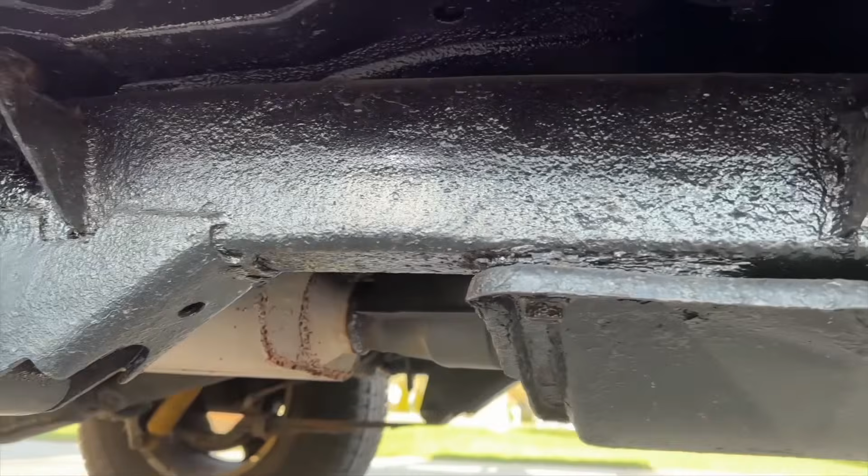Hardtop came with it. A lot of work's been done to this already. It's been rust treated underneath it. Frame has been repaired where it has needed to be. And I'm telling you, I'm in love.

So one of the spots that always go bad on these Jeep Wranglers are the floorboards. And we can see here, somebody already welded in brand new floor pans into this Jeep, both sides. I haven't had a chance to investigate all the way in the back yet, but that's huge. Also, when running a magnet down this area on each side, this is a big area for rot on YJs. This is all solid, looking really, really good.

And if I can get under here real quick, it's all looking really clean along the rails. The light's not cooperating with me at all here, but somebody took the time to take care of this. Frame all the way to the back, to the front. Looks really good. I actually took a really good magnet before when I was inspecting it.

I went through and checked stuff. You can see here we got weld plates in. It's been repaired, but it looks like it's been repaired really good. And man, if somebody's taking the time to go through all that work, that's a good sign for the rest of the Jeep.

She's got some big meaty tires on there. Darn near new. I mean, look at the tread on these. Gonna run those for a while, but I'll probably downgrade those, make those a little smaller. It's a lot of work for that little 4-cylinder.

But there it is. That is gonna be a project. It's gonna need some repairs. You can see here, this is the only major rust damage, knock on wood, that I've found so far is in this windshield frame. You can see going down there, that's a very common spot for these YJs to go bad.

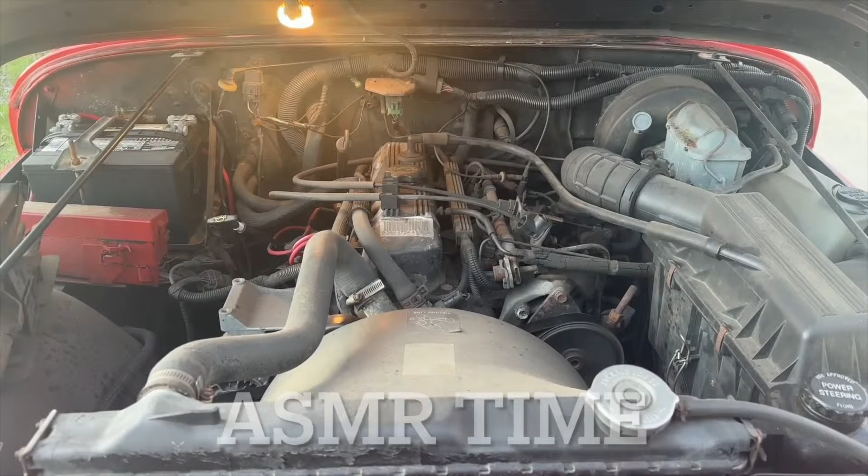And here's the power plant, inline 4. That's how these roll, and this actually looks pretty darn clean. Can you believe that light actually works? Those never work. Looks like it's got fresh wires, distributor. Battery doesn't look that old.

A little bit of cleanup, this is going to be no problem, but we'll start going through stuff one piece at a time, as we always do. But there it is, right there.

Sure, it's going to have its little issues, but first look at it. This motor compartment looks pretty good to me. We got new muffler and exhaust all installed on it, and also skid plates all the way up on this too.

Kind of leaning underneath the car, taking a look with you for the first time almost, because I literally just pulled this into the driveway not too long ago. I've been wanting a Jeep Wrangler again for a long time.

And we got one. First things first are gonna be get this bikini top off, so I can go pick up the hard top that came along with it. I always preferred mine with the hard top on it. So this bikini top's got to come off, which is super easy.

The only thing with the soft tops is that there is a small little rail underneath here that you got to take off before you put the hard top on. So I got to pull that off.

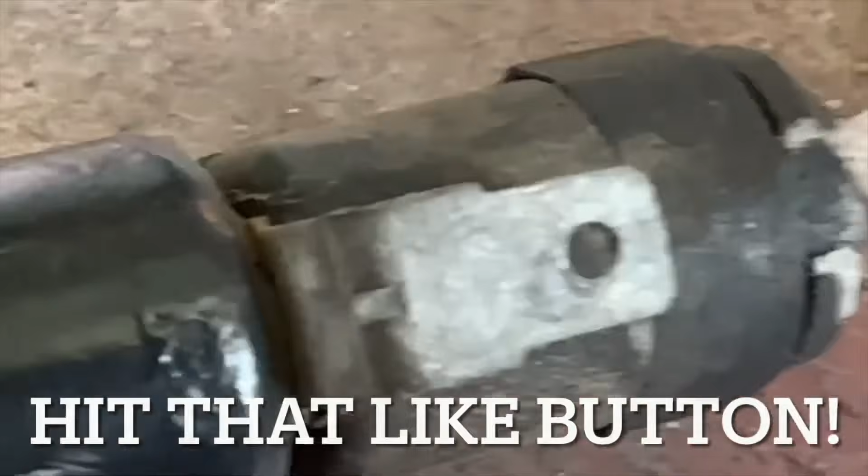Just tilt the bar a little bit, do that on both ends. Here's a closer look at that little ring we're dealing with. Basically you just want to slide your screwdriver - there's a little notch there even - you can slide right under and then pry that up. That's all you need to do.

We'll come back down to this bottom end, it's going to be the same thing. Just slide in a flathead, pulling that clip back just a little bit and tilt that stabilizer out of the mount, just like that. Also note, silver end goes to the window, solid black end gets mounted to the actual hardtop.

Before I install those, I'm gonna go ahead and clean off these mounting points. They're a little dingy, a little dirty, so let's clean those up a little bit. Just gonna put a little dab of all-purpose grease on each one of those mounting points. Don't need a lot, just a dab will do ya.

After you grease those up, you're good to go to install your new supports. Kind of new to the YJ stuff, it's been many, many years since I've done this. I was looking at Jeep part websites, and take a look at this.

It really does pay to shop around a little bit. Here's a well-known Jeep website - stabilizer, $32.99 each, man, ridiculous. Way better option, half the price - head on over to your local auto parts store. I went to AutoZone and got a lift for $17 each versus that upper 30 number I was seeing everywhere else. So honestly, with these old Jeeps, hit up your local auto parts store. Nothing specialized about this, straightforward. Save yourself some cash, you're gonna need it.

Second verse, same as the first - again we're just gonna grab it, tilt it, pop it right on. Go ahead and lift up our gate. You might have to twist the end just a little bit. Lift that up, drop that in, just like that. And now we've got ourselves some stabilizers.

Ah, what a relief, no more banging of the head. Closes up really great, bam - there we go, new lift stabilizers installed on the Jeep Wrangler. And now when I lift it, it magically stays up. That's awesome because I've been storing all my tools and everything in here for the Wrangler and just working out the back, so this is gonna save me a ton of literal headaches.

So really, that's all there is to it. I'm gonna have to come back and attack these another day - I can't live with that. But the new stabilizer is in, and we're good to go. That's about it, man, this is about the simplest little upgrade or fix that you can do on anything. I mean, that's how it's gonna work on pretty much all vehicles.

Quick look here - I did end up finding a set of hard doors for it. Right now I've got the soft top, lower short doors. I got myself a pretty good set of doors, they're gonna need a little bit of work, but overall I've really lucked out with this YJ.

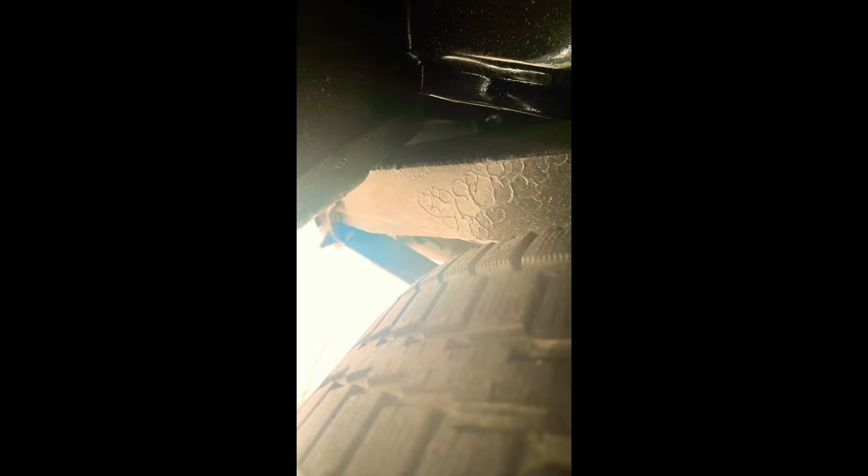Somebody already did the major welding on the frame. Somebody already welded in brand new floor pans. How about that? Everything was undercoated, a little to excess, but rather have it than not.

Someone was kind enough to include the locking lug socket with the Jeep. That's a win. Can we talk about more excellent welding repairs on the frame? That's so huge. Got this really fancy front bumper, never had one of those before. Even got myself kind of a fancy rear bumper. Kind of cool. Those are just a few things I got lucky with on my YJ.

I've never been a huge fan of the half doors on the YJ. That's why I went and found a set of hard doors to go with my brand new hard top. Well, not new, but new to me. These are going to need some work, but nothing we haven't handled before.

The mirrors are gone, but that doesn't bother me too much. I got a nice set of mirrors on the half doors. All in all, the main panel seems pretty straight. Not sure what the hell was going on there, we'll have to patch that up. Some surface rust around some of these areas, and we'll have to swap out the locks as well.

This is the big part. Usually you see those rot out right here. This one's got kind of a unique one, hoping to get that repaired. Got a little bit of rust starting here, actually it's probably a lot deeper than I think. Both the doors have all the trim pieces that match the current interior on the Jeep. One nice crack there too that'll need to be repaired. Hard top, hard doors for my YJ.

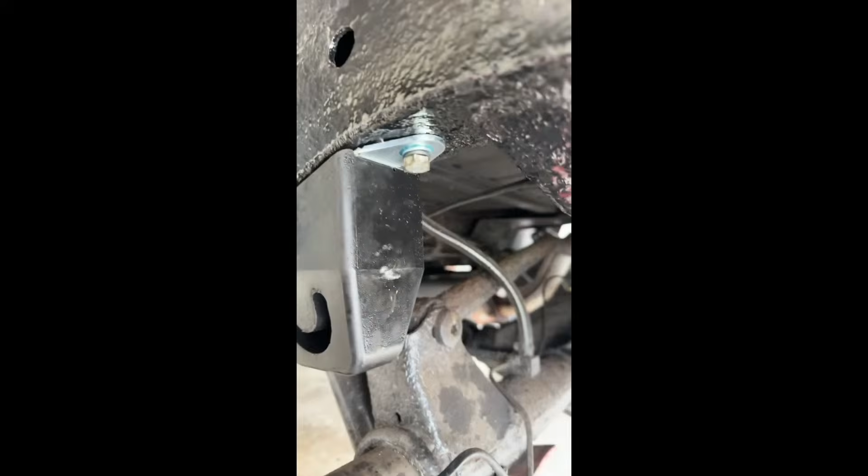All right, project update. Driver's side bump stop is in. Managed to re-tap that into an 8mm by 1 onto the passenger side.

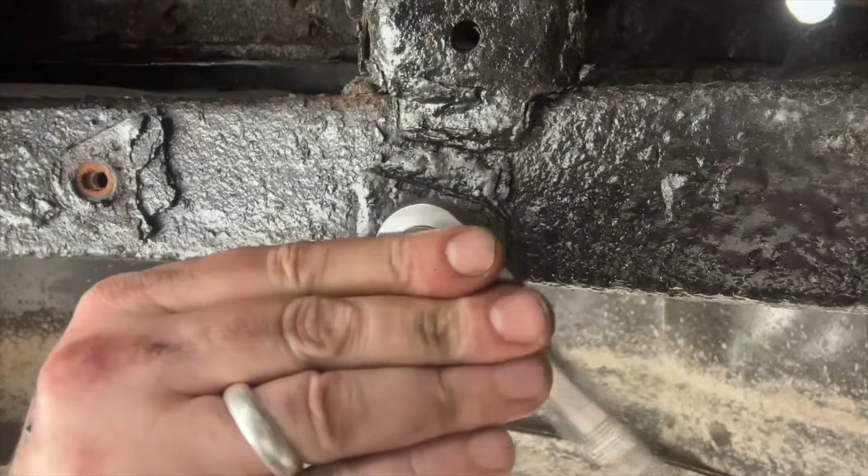Fingers crossed on the next one. All right, over on the other side, let's see if we can get as lucky on this one. Come on, baby. I think it turned a little. Gonna kind of hold your breath for a while, make sure you're not bending the metal. I think it's coming out though, I think we got lucky.

Yeah, we got lucky, we got both of them out, but I just spied another thing we're gonna want to be watching for. We got our brake line coming in right across the top of the axle, looks like there's a little mounting bracket here. This needs to get out of the way where this bump stop's gonna go, so I'm gonna see if I can get a little finesse on this and move it just a little bit, real gently, but it's got to get out of the way of this, because otherwise when that bump stop comes down, it's gonna smash my brake line. That's no good.

All right, just kind of made a little loop in it. There's enough play in it, so now when that comes down, that's gonna be out of the way. Don't have to worry about that. Something to watch for. I had to do that on the other side too. Got to be careful, that's easy to miss.

Now we just want to make sure we get all the old stuff out of here. Look at that, this crumbles right before your eyes. That's the old bracket. Just knocked it off on the other side here too. Just want to make sure I get down to clean metal, and then I'm actually going to undercoat paint this too, just to keep protecting as we go. I'm just gonna get up under here with my wire wheel, clean off this whole surface. You can see that rust kind of flying off of here. I'm gonna get this real good, try to get it down to bare metal.

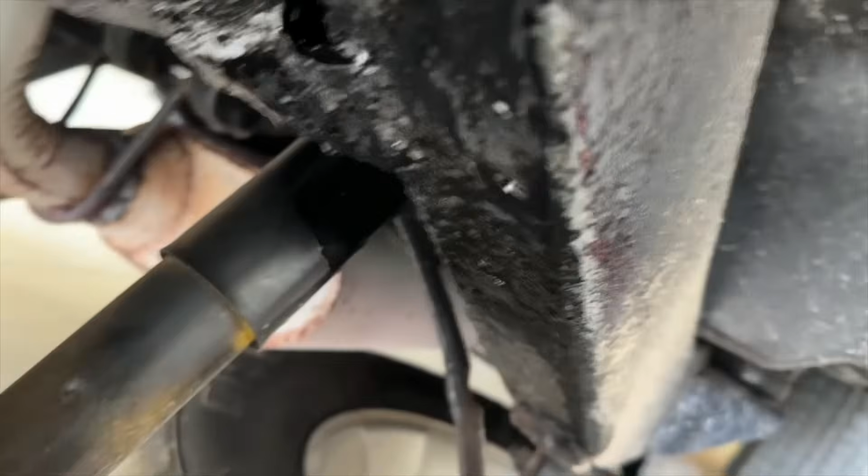All right, we're ready to place it. There's a slight bend, you can't get it wrong. They are side specific, so this is the right side, okay? Middle bolt in towards the back, and then on the outside of the frame is where our mounting position is. So this is the right side.

Let's get it in. I'm gonna tack in the first one first and just get it hanging there, and get both of them started. We're in good shape. And just like that, gonna reach up.

See if I can do this left-handed. See if I can find it. There we go, just like that. Get that one started. We'll grab our wrench.

Put that back on. Almost there. It's always fun when you get to flip the switch on the ratchet on a project. Send stuff back home. Let's go. Giddy up.

All right, that one's pretty snug, so let's hop on over to the other side here. Let's get the other one in. Rear bolts in, I'm gonna go back and tighten up the front one.

You just need to put these snug. You don't have to go all He-Man on it. You just need these nice and snug. You definitely don't want to strip them out at this point. That's about right, and there you go. With those two bolts in, our bump stop is done on the Wrangler.

I did run into a bit of a problem on the other side. A very typical thing on Jeep Wranglers is the driver's side is always a little bit more crusty than the passenger side, and I did end up breaking off one of these bolts. So what I ended up doing was drilling a new hole and tapping new threads and just got a new bolt and put it in. So if that happens, just slow down, take a deep breath, drill it out and tap it, and you're gonna be good to go. But it definitely was a bit of a time suck because I didn't have all the right tools, but now I do if I ever need to do that in the future.

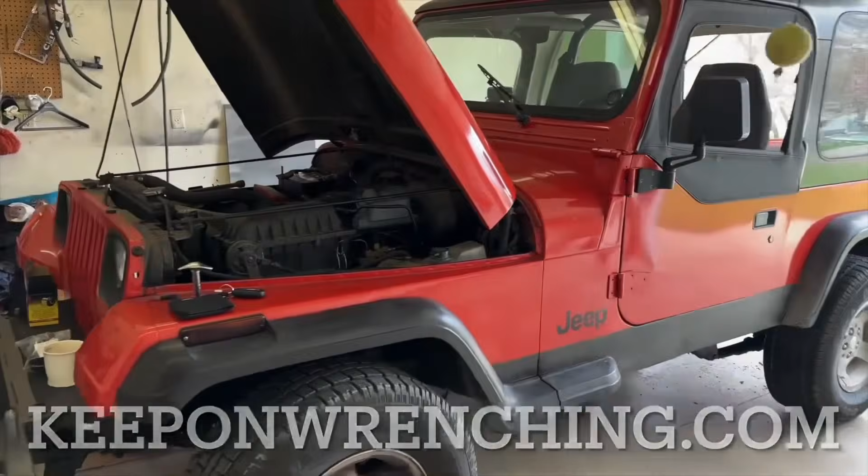Something a little different coming up on the channel. Here's a look at our next restoration project. We've got ourselves a set of hard doors for a Jeep Wrangler YJ.

They need some work. The window doesn't roll up and down on this one, gonna need to dig inside and figure out what's going on. Other than that, most of the hardware is here. We've got our strap, we've got our reel, we've got our handle here. Everything seems to work otherwise. Even got the flippy window vent.

The panel itself isn't in that bad of shape either. Needs to be fixed up on this corner, but that shouldn't be a problem at all. Weather stripping seals aren't terrible, but they are cracked in some places. I already got myself a new set, so we'll be learning how to install these. Window vents even work. A little bit of rust cleanup here, new weather strip, and these will be back in service.

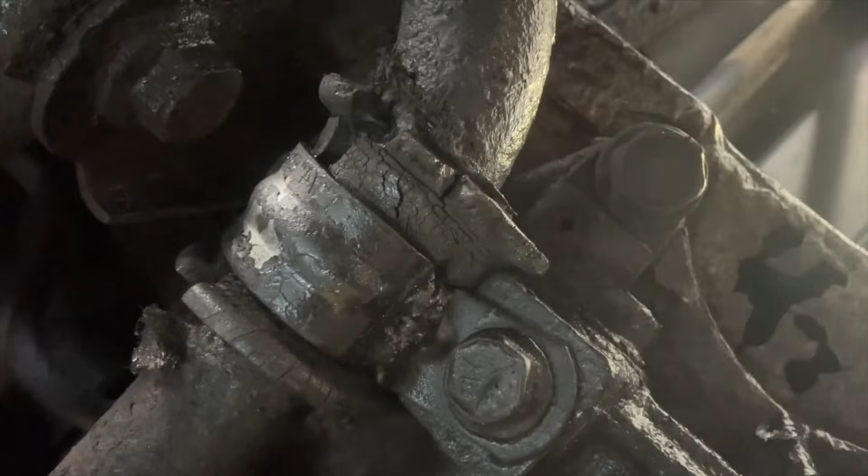Nothing too thrilling here, we're just gonna try. And I'm wondering if maybe on this side there might not be a nut. All right, driver's side, there is not a nut. It's actually put right into the casting. So passenger side, there was a nut on the top. So note to self, that does not exist. Go ahead and put your ratchet in reverse mode. This darn undercoat is ridiculous at times.

Got lucky on this first one. It's turning. There is no nut, by the way, on the top of this, it's actually into a cast piece. So passenger side does have a nut on it, but we're just going to take out this long-winded bolt.

So here's a look at it from the side. This is the bolt we just took out, and then the other one is on this back side. Doesn't feel like there's a nut on this one either. I think an extension is going to come in handy on this one. It's kind of up there at a weird angle. So I'll bust through the stupid undercoat again. Hopefully we get lucky.

This one might be a little bit more stuck on there. Come on, buddy, hard to get a grip. You gotta kind of break through that undercoat. It's a booger. That one's gonna be a booger. I got it! Woo! That was right on the cusp, I think, of breaking that. I think we got lucky on that one. That was determination.

The instructions on this clearly say to grease the inner diameter of the bushings. Pretty much anywhere metal on metal is, we're gonna wanna grease that up. And in the kit, they did provide us with a small tube of grease. All right, pretty straightforward, we're gonna grease up the inner diameter of this. Not rocket science here, just make that a nice coating of grease. This is some sticky grease that they give you. But yeah, that's all coated on the inside edge, inside diameter, as they say. Let's go ahead and get these installed.

When I was looking at this kit, I was a little worried that I'd have to take the whole bar off in order to get the bushing in, but there's a cut in them, so you basically just slip them right over. That's really, really nice.

All right, here we go. I'll try to give you a good angle here. I'm just going to use the split, expand that over there. Flat side up on that bushing, just like that. And then you're going to grab your bracket, put that in. That looks like that's going to be perfect.

And then the tricky part, I'm on the passenger side now. You got a nut and a bolt on this, so we're going to get that in there, get that lifted up. There's a little bit of tension once you pull this off, but it's nothing you can't just push on yourself. Go ahead and get your nut started on that. Let's go ahead and grab our other one over here. Slide that up, give her a little bump, and tighten that one on.

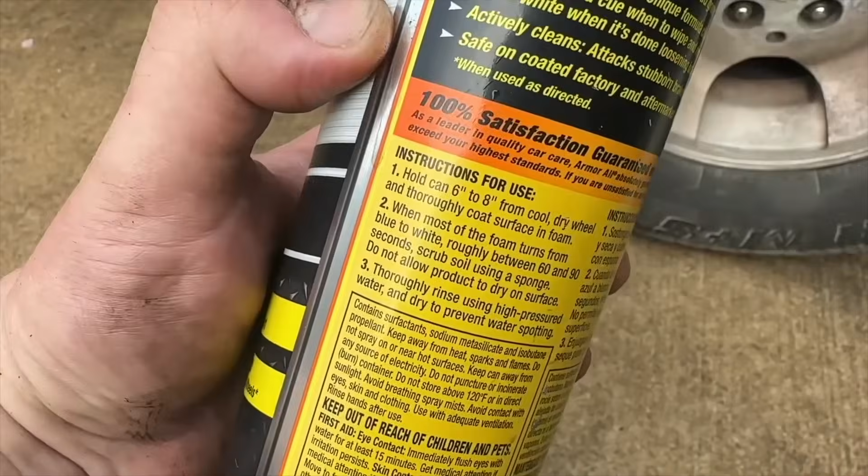All right, 6 to 8 inches, this must be important, let's spray this down. Look at that pretty blue, look at how nice that is. Ugly wheel, hopefully it's going to be gone here in just a matter of minutes. They say it should turn white within 60 to 90 seconds.

And then we get to scrubbing. One thing I'm noticing right off the bat is that this stuff just kind of falls off the wheel. I'm constantly reapplying it, which the instructions didn't say I was supposed to have to do. What's going on, guys? Yeah, I'm not sure what's going on, all my product seems to be falling off. It hasn't turned white yet, so I'm just going to start hitting it with the 3M pad and see what kind of damage we can do.

Break through this stuff, I already know the corrosion is through the clear coat, but ooh, look at this. Wipe that away, that looks really good. Yeah man, I hate clear coat. Have I ever mentioned that on the channel before, how much I hate clear coat? Because you got to constantly fight it all day.

I'm going to keep wiping this down, we'll see where we end up. I think it's going to take a couple coats, honestly. You got to put in the work if you want clean wheels. All right, been scrubbing, now it says high pressure water, rinse this bad boy off.

So you can see that clear coat is really eating through, but it didn't do too bad of a job cleaning up things that weren't totally damaged. I think I'm going to hit it one more time, I got some little details to get to.

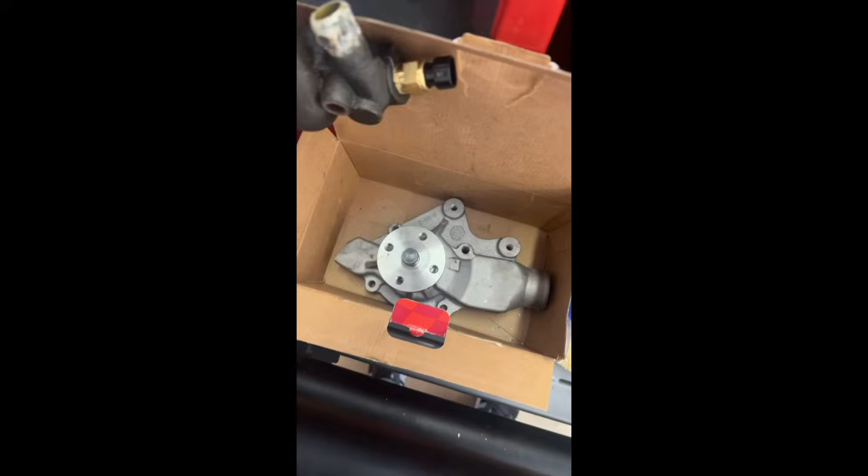I'm installing a new water pump. There are a lot of bolts of varying lengths and sizes. To stay organized, I got myself a little piece of cardboard, laid my new part down, and marked off all the bolt points. As I take one bolt out, I go right to my cardboard and insert it there, so I've got a good reference for all of my bolts. That's where that bolt stays until it's time to reassemble. That's just one of those simple things you can do when you're diving into new territory - it gives you a little reassurance that it's all going back together right. Hope you find this useful.

So when the issue first started, first thing we thought of right away was it's got to be the temperature sensor, right? Here's the thermostat in this 2.5 liter Jeep Wrangler, and then here is the temperature sensor. Now, I didn't realize - I actually thought the sensor sent the message to the gauge, but that's not what is happening. There's actually 3 parts to this system: you've got your thermostat, you've got your temperature sensor, and then way back in here, there's another piece to the puzzle.

All right, I crawled way up on top so you can get a good look at this. We need to get to the sending unit. That sending unit is right there, that white piece right there. It's a single wire that actually sends the information to the gauge.

See if I can see that. It's buried under a bunch of stuff, but there it is. That is the sending unit, the third piece in the puzzle. It's a single wire that basically just pulls right off. I'm gonna see if I can get in here and grab that.

To test this, you're gonna detach it and ground that connector inside this plug. All you need is a little alligator clip piece of wire. I alligator clipped right to the ground - there's a ground post right back there. Then I'm gonna take this end of the wire and put it inside the wire piece connector here, and then we'll do our quick test.

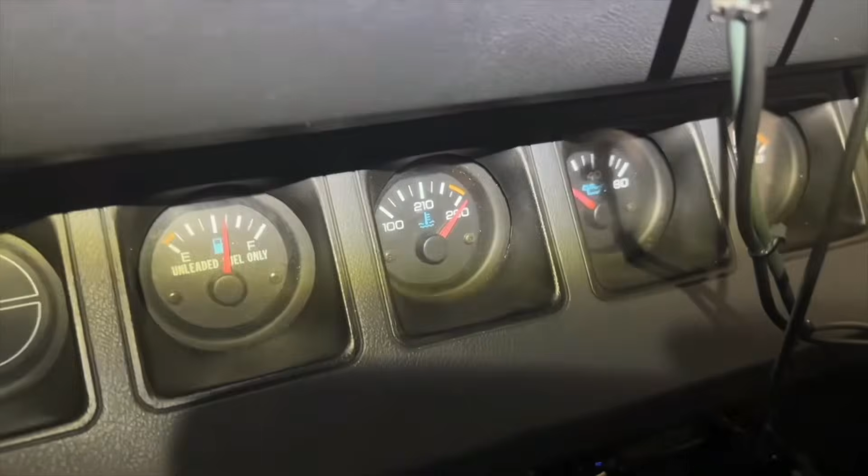So next, you're just gonna turn the key and watch the gauge. All I'm gonna do is turn the key ignition on - I'm not gonna start the vehicle, but there you can see that gauge pegged, and that's actually a good thing because it means the wiring is good, and the problem is the sending unit itself. So again, you just turn the ignition on, your temperature gauge should peg, which it did right there. That tells me I need to get a new temperature sending unit, not a sensor.

Lots of moving parts here. Now, alternatively, if you don't see that meter peg over when you turn on the key, it's probably a sign that you have more of a wiring issue than anything. Because we're actually grounding that switch and completing the circuit, and then that moves the needle. So if you're having the issue, you're probably in wiring territory, something I really don't need to get into today because I don't fully understand it. But based on what I'm seeing here, this indicates a bad sending unit.

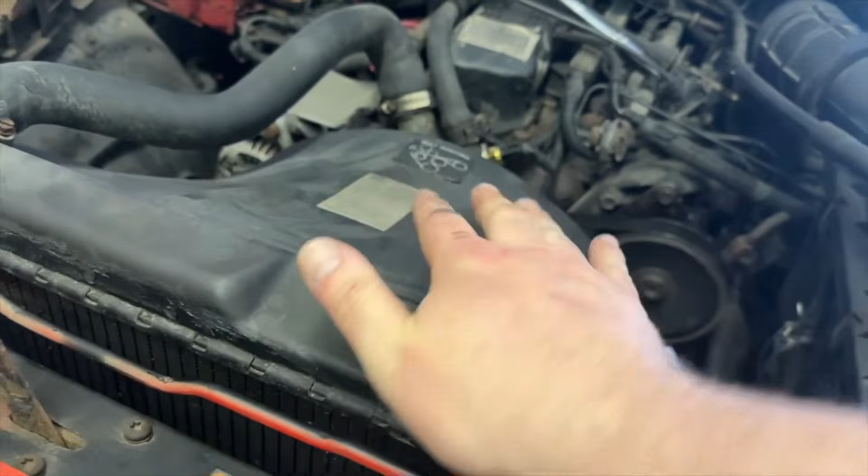I think it's just a good idea to undo the radiator cap. I also have put some cardboard down to catch any antifreeze. Hopefully it's going to be minimal antifreeze that comes out of this.

I'm also going to consult my manual. Here's my manual, I've got another one too, but this one is the only one that has any information on this. And this is all I see: if the sending unit must be replaced, simply unscrew it from the engine and install the replacement. Use sealant on the threads. There'll be some coolant loss as the unit is removed, so be prepared to catch it. Check the level after the unit has been installed. That's going to mean I'm probably going to be burping the radiator a little bit as that goes.

But I'm wondering what kind of sealant I should be using. A couple other worthy notes - this should be done on a completely cool engine. As far as the sealant goes, Teflon tape was used on the installation of the new sensor, so I think I'll go with that since I'm not finding any other resources indicating otherwise. Just a little bit of Teflon tape on the upper threads.

So again, that temperature sending unit is right there. Note, it did break when I was pulling the switch out, so it was brittle. It's a 14 millimeter down there. I'm going to get that out with the extension on the ratchet. Let me check that - apparently this one is a 14 millimeter.

I'm going to slowly back this thing out, just a little bit at a time. But yeah, it's a 14. Just going to take it really slow and steady on this. Pull this out.

Kind of watching to see how much coolant I'm going to lose. I got my part pretty close, so I can get it in there real quick once the time comes. All right, I think we got it. I'll be able to reach down there and grab it. Spin it with my hands - it was nice and loose. Don't see any fluid yet. Just a little bit of antifreeze bubbling out of there. Ooh, a lot.

She's bleeding out pretty big. I'll be putting some antifreeze in this - we'll be refilling the antifreeze. That was a lot more. I'm really glad I got that - I did put a catch can underneath. Learning every day. I don't know if there's really anything I could do to prevent that.

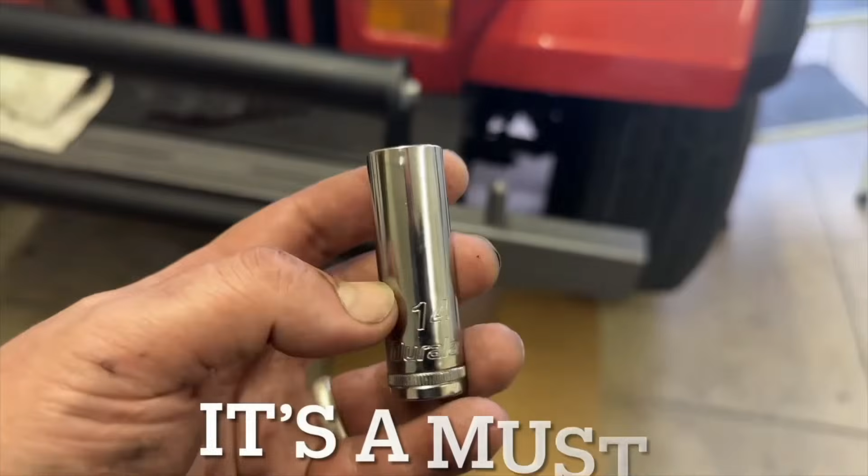But for now, at least I know that sending unit has been replaced, and that's one less thing to worry about. I think the nice thing to have on this is definitely a deep socket - a little shorty ain't going to work. And I can't imagine trying to use a wrench going back in there, that'd be absolutely miserable. So deep socket, you should be good to go.

Here's a look at the old part. You can see that just broke right off - so this was my problem right here. Now that we've replaced that, let me see if I can find the part number here - temp switch interrupter, that's it. Fingers crossed that did the job, but I feel pretty confident about it based on the test we did in the previous video.

All right, I hope you find this useful. Just make sure you do your radiator top off right and get all the air out of the system. And then I'll do probably a short or something once I get to that point, and let you know whether or not it worked. I'm pretty confident that it will.

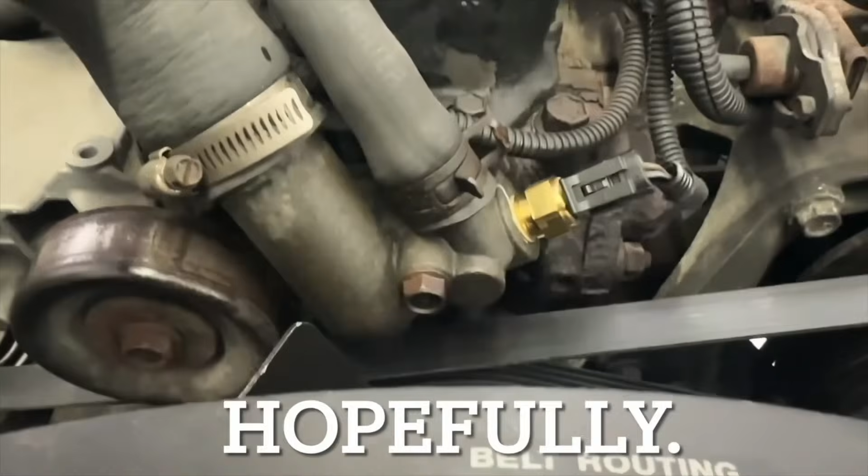Hopefully those two bolts come free. I've been dousing them with PB Blaster, Deep Creep kind of products here for the last week, so fingers crossed that all comes out.

You know, I don't really mind - I'm trying to build this thing back up as reliable as possible, so I don't mind putting new parts into this. So I'll have a new thermostat, new sensor, new sending unit on this, along with new hoses and a nice new flush and fill on the radiator.

So that's kind of my day - I'm going to dive into all this stuff. Also, that water pump is way down below here, so this is going to be a little bit bigger job. We'll see how much gusto I have.

All right, I just wanted to share that, man. That would have saved me probably $40 in sensors and sending units if I would have just checked for that.

A buddy of mine actually sent me a video of his starting cold, and that's where I put two and two together and realized my thermostat is open. Here's a clip of what he sent me - he just started his YJ totally cold, and looking inside there, you don't see any rotation of fluid at all. It's actually really, really still - I think that's just engine vibration you're seeing in the ripples there. Very, very different from what I was seeing on mine. So thanks, Brad, for sending that clip.

You can clearly see how that fluid was just dead still on a cold start, so I'm really convinced. Hope this helps you trace this down. Again, I'm brand new to this kind of stuff, I'm learning every day, but that's kind of part of the adventure. I like just learning stuff and diving in.

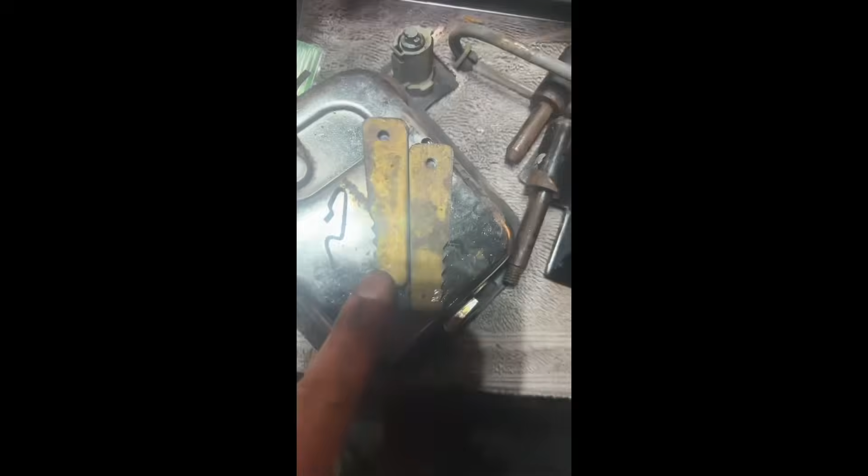Holy buckets, talk about parts though - lots of odds and ends and little R-clips everywhere. These buggers were a puzzlement. Can you name this part? You know what those are?

First time I ever encountered one of those.

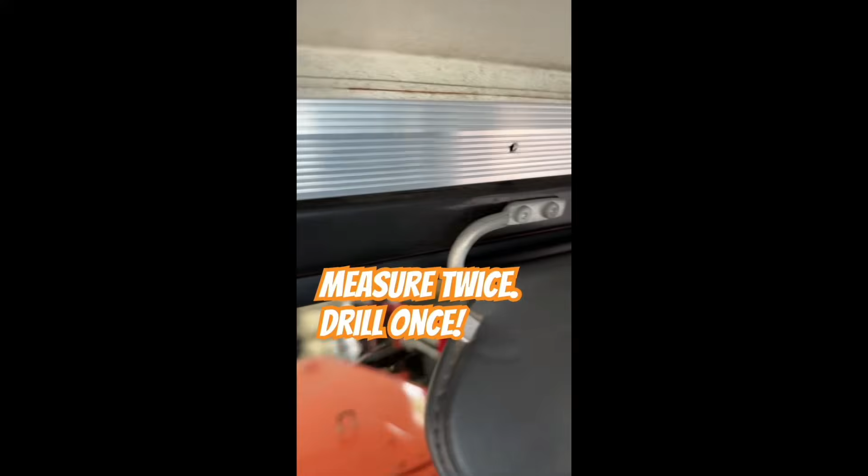We're going to do our first one first, get that all centered and in place. Now I mark the bottom, drill those out, and put some bolts in. That beats a couple zip ties holding on the hardtop.

I got myself a set of Jeep YJ doors - full steel. Even got them welded up where it matters. Gotta love a good clean weld. All the weak spots done. These doors are going on this Jeep.

Time to get out the sandpaper and primer. Question is, do I paint it tomato red or do I go with black? I want this thing to be black eventually. Decisions, but at the end of the day, I got myself a nice set of YJ doors.

All I really wanted to do was put steel doors on my Jeep. Nobody told me it was gonna turn into this. These are the easy ones, these are not so easy. I'm sure this is gonna become a pain in my butt too.

Not too worried though, I'll get it all back together as soon as I get the dash put back in.

Why did you put nuts on the back of these? Why didn't you weld the nuts into the freaking firewall, into the frame? Why, Jeep engineers, why? I feel like it's just a joke, like they just laughed all the way saying, ha ha ha ha ha.

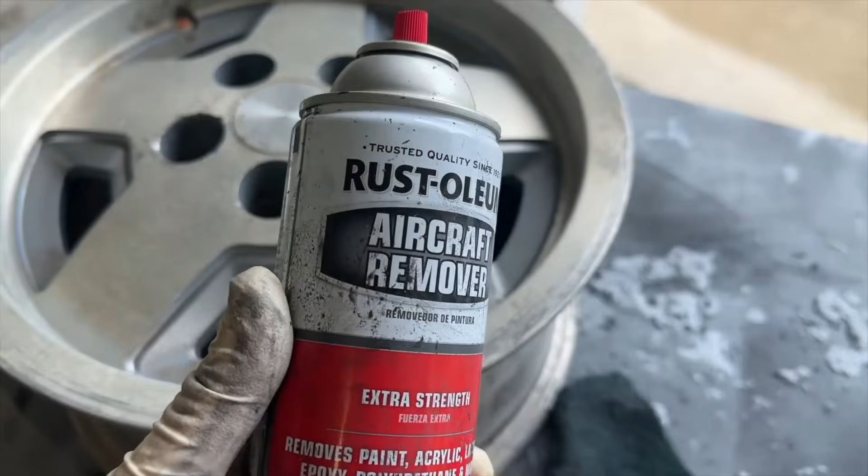First step, make sure you wash out the wheel really well, then get yourself some Rust-Oleum aircraft remover. Get that applied and let it sit for 20 minutes. You can be kind of liberal with this stuff. Get a good coat all over it, and you're gonna walk away for 20 minutes. That's the hardest part, is walking away.

You can pretty much see this stuff go to work instantly. All right, 20 minutes are up. I'm gonna go to a wire wheel on my drill, and go around and hit everything, start knocking out that clear coat. It should come peeling right off.

To get inside some of those tight spots, a nice little wire brush works well. You can get in those little crevasses. Also, a 3M pad will help you get in those nooks and crannies. Once you feel you've done good enough there, give it a good rinse.

Now let's just give her a little dry off here. All right, you can see we still got some discoloration and things, but we're gonna get that out really fast. The main thing we wanted to get rid of was that pesky clear coat.

Now it's game on. All right, already quite an improvement, but you can see we've got some discoloration, kind of around the rim - there's a little remnant there. I'm gonna go ahead and grab some 80 sandpaper and an electric sander, and knock that out real quick.

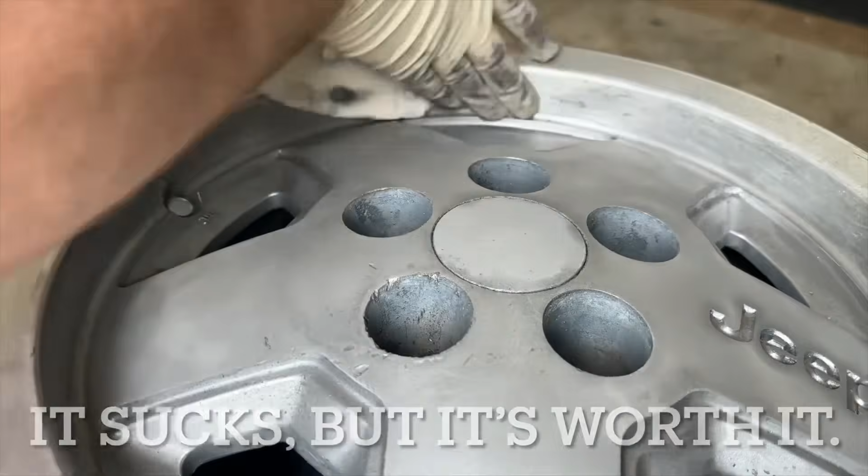This is where things really start to move fast. We're really starting to get someplace now. These edges look actually nice and clean, so I'm gonna go ahead and up to a 120. Only thing that's really left is you may have to get in here by hand with your sandpaper to smooth all this stuff out. But that's easy - just go all the way around the clock and get this as uniform as possible.

So here we just gave it a little bit of a rinse. Now let's wipe this off, get all the residue off. This is actually looking really, really good.

From here, you can really go as crazy as you want. I'm not looking for polishing - this is really just a Jeep. I just wanted that ugly yellow clear coat gone, and that has been accomplished.

Let's take a look at before and after. Here's the scuzzy wheel before - look, the clear coat's all chipped up, it's got all this yellowing going on. It just looks gross, it just doesn't look good. God, I hate clear coat.

So really, just a little bit of effort will get you up to here, and this is much more respectable, in my opinion.

One of the cool things I've noticed about this process is that from the moment you do the clear coat remover for 20 minutes and let it sit, you can get pretty much the other wheel completely sanded and cleaned up. So you can just get kind of going. I really think this job is only going to take me maybe 2-3 hours today - way less than I thought.

But again, I think the key is let the clear coat remover work. Don't get ahead of it, don't get antsy. Let it sit there for the full 20 minutes.

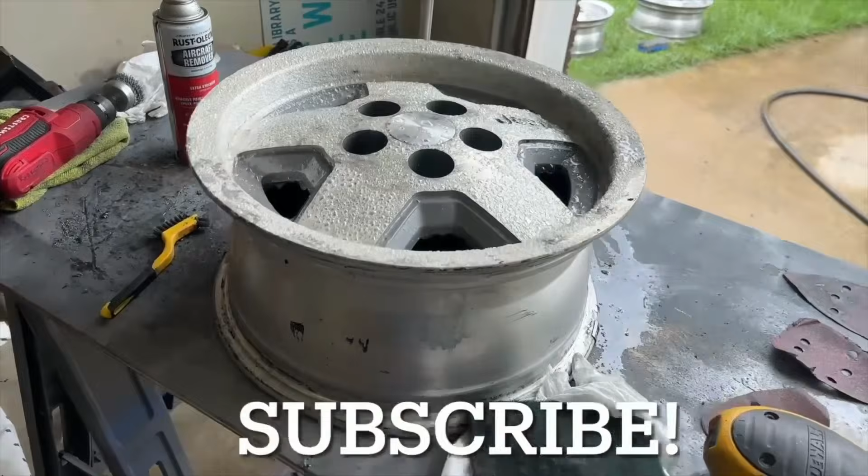I got 3 more wheels to do, I better get to work. Oh, how silly of me, I forgot to say, we'll see you in the next video or live stream.

So let's review. You got an ugly wheel. Make sure you clean it really good, get it nice and degreased. Then take your aircraft remover, give it a real heavy coat, and let that sit for 20 minutes. Next, grab a little wire wheel and start knocking out the bulk of that clear coat. If you need to, get yourself a nice steel brush, or use a 3M pad to do some damage. Next, go to town with some sandpaper, I did 80 and 120. Really pleased with the results.

From there, feel free to give your wheel one final good clean, give it a dry. If you want to clear coat it, you can do that, but otherwise you can just get some protectant on it. Pretty cool, not hard at all.

Big day for the Jeep Wrangler interior undercoat, or interior coat with Raptor. We have sanded the entire interior, still got a little bit of rust to get after. The palm sanders and wire brushes have been getting a workout today, and also the shop vac is getting an extra workout today too. We're doing the whole damn thing, front to back interior with the Raptor.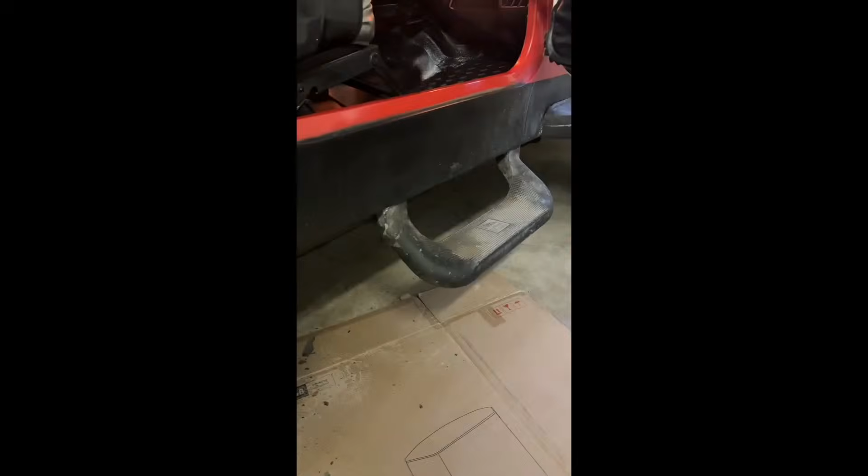While I was at it, I added one of these Bestop cargo carriers on the rear gate. Went ahead and got upgraded barricade floor mats all the way around and added some solid seat covers. Man, these things fit really tight. Can't have a Jeep without some hand grips. I also added a step so my wife can come along on Jeep rides. Got myself a soundbar too because you need music.

I've been really focusing on the interior bits. This thing has come out really, really clean. I'm loving my 94 YJ.

Well, what's the next project on the Jeep YJ? I'm gonna be removing the fender flares. I've heard that these can be a real bugger. I think getting a good soak of PB Blaster going is gonna be called for. I can only imagine how rusted all those bolts are gonna be. Wish me luck. I'll try to document the journey as long as there's not too much profanity in my future.

You might be wondering why I'm taking them off in the first place. Because I gotta paint the Jeep. They gotta come off. They also need a bit of restoring.

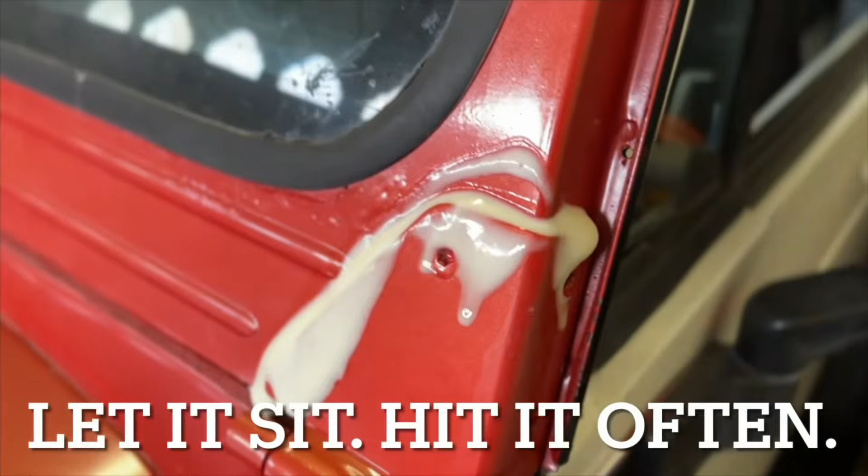First step, days and days before you even want to attack it, hit it with some penetrating oil and try to get these things lubed up to help you on the extraction process. Next, do yourself a favor and get through that paint coat. Hopefully you don't have to deal with this, but yeah, you're gonna wanna clean out any paint over the top of these bolts. You can see here, I've already been successful on getting 2 of these to move.

Let me show you the process right now. First off, go and find the right bit. It's gotta fit nice and snug. This is a T40 on this Wrangler. I'm gonna position this really firmly in place and then grab your steel hammer or mallet. You gotta shock this thing. Let's give this thing a few good taps.

Next, I'm taking that bit and I'm putting it on my old school impact driver. Not using an electric impact driver on these, you're just gonna strip out the head of the bolts. Ask me how I know. Old school impact driver in place, nice and perpendicular. You're gonna be twisting hard to the left, and then you're gonna be hitting this with the hammer. Let me get you a little better view.

Do it a little bit until you start to feel it budge. Think I got it to move. After you've done that, go ahead and grab yourself a ratchet or a breaker bar and pray you hear the magic crack. Got it. Just like that. Whew, that still wasn't easy. From there, should be able to just slowly start backing this thing out.

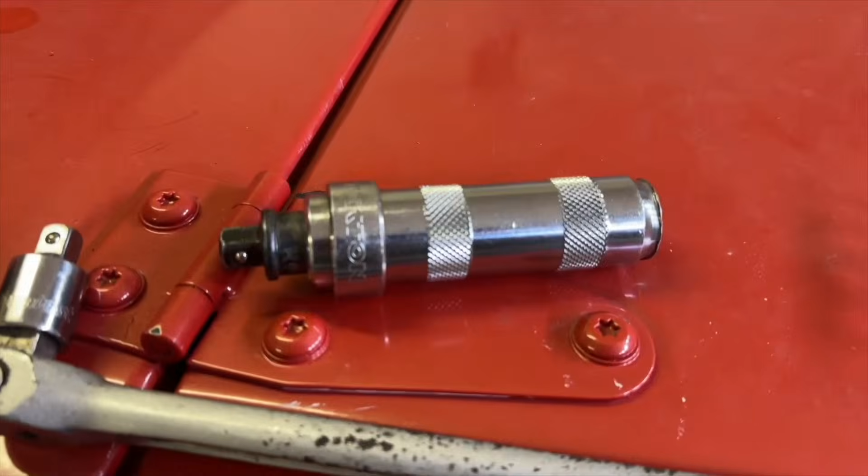I hope this video helps you out. Get the hammer, ratchet, get the right size bit for whatever it is you're working on. Maybe drag out a breaker bar. And man, I'm telling you, these old school impact drivers are pure gold. I would tell you, just skip that electric impact. Super tempting, but not when you're trying to break loose something like that.

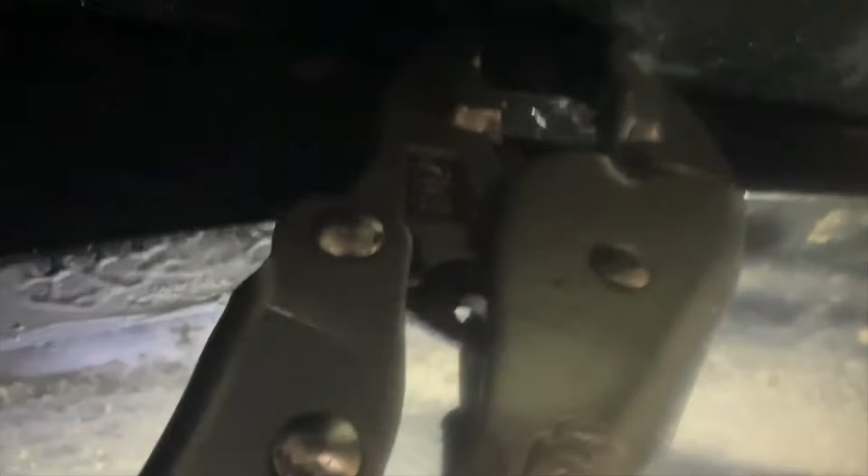I think your best bet is to get a pair of vice grips and get that around that outer nut. You're gonna need to go up inside of here. It's gonna be almost impossible to show you, but they're little rectangles. They're on the outside, they're facing on the out. So kind of feel up around there, so you can get your vice grips up around and click these in. You're gonna wanna hold them because you're guaranteed they are gonna wanna spin. There's a pretty good look at getting around that outer washer, that outer nut.

Next up, 8mm. So 8mm wrench, 8mm socket, whatever. Probably need them both along the way, but 8mm to pull these out. All right, let's reach up in here. See how bad this is gonna be. Hopefully it's not gonna be too painful. We are about to find out though.

This one's coming out easy. Didn't even crack or anything, it's just coming right out. So let's get this one going. So far so good, it's coming out pretty easy. Yeah, it actually fell right out. That's awesome. Now we can take a look at what's going on.

So here is the little block, okay? And really it's just a metal screw that goes into here, just like this. That is all that is holding on those moldings. There's just, I think there's gonna be 32 of them. I'm sure there's gonna be some nuances along the way.

And some nuances there definitely are with these things. These are pretty finicky, it's really blind work, so it takes time. Some of these are definitely gonna be harder to get at than others. This one looks like we're gonna have to get underneath the actual splash guard underneath here, so I'm gonna have to move that a little bit. And then also similarly on this end, we got one here as well, right here. We're gonna need to get up underneath there and just move that splash guard, little plastic grill right here, gonna have to move that a little bit.

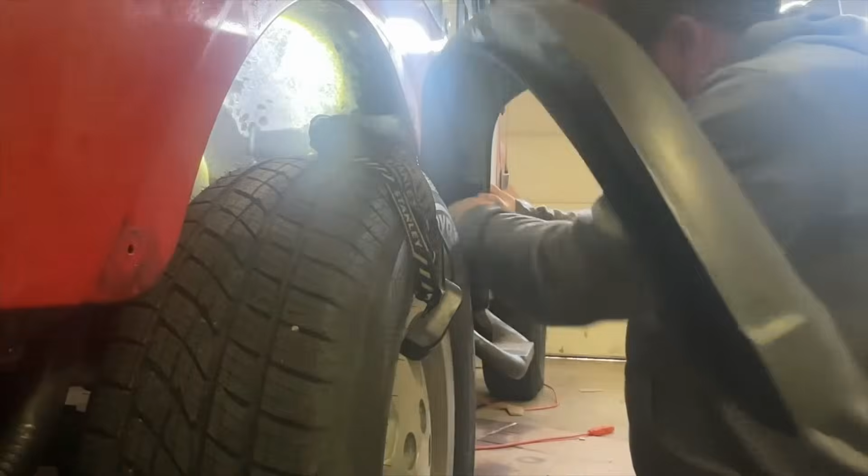Oh, we got one more, of course. And of course the last one is gonna be the hardest one. Just trying to find where the hell this thing comes through. It's a tough one. I can already tell some of these are going to take immense patience. This one is really tucked up underneath here. This one's really tough, this last one is not cooperating.

Deep breaths, there was no way around it. I actually had to pry this guard out a little bit, this little plastic shield. There was no way to get at the nut. Now I can get at it and pull this piece off. Yeah, just had to do it. It'll pop back in, no problem.

Definitely encourage you to wear some gloves. These black moldings will tear your hands up, something fierce.

You gotta get back in there. Man, this is a booger, man. I'm gonna start swearing pretty quick. Had to pull it out a little bit more just to get in here to get this darn thing. This is a booger. There's not really a good way to attack it either.

Damn thing's hanging around. Wish I would have done this one first. Oh man, you're just working so blind.

Yeah, it is literally like a quarter turn, not even a quarter, like one tick of the ratchet at a time. And man, once it slips off, you're starting all over again. This one really sucks. Everything was going so well until I got to this one.

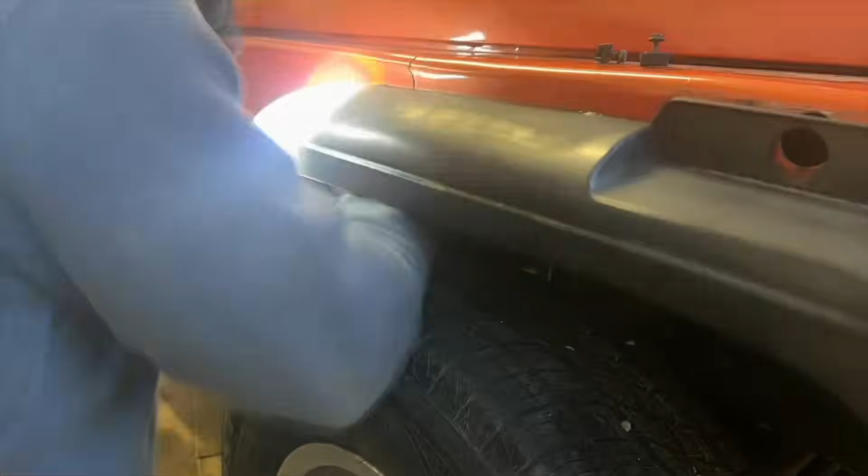The hardest part about this whole project is that the majority of it you're working completely blind. You can't really see the fasteners. You're really working just by feel, and that can be kind of frustrating at times. But one by one, those things do start to fall out. And we've got ourselves 1, 2, 3, 4, 5, 6, 7, holding this front end together.

Now we come down here, and we're gonna address those bolts. Sorry, I got my headlamp on, but you're gonna need a 7/16 to get these bolts out. And really we're just looking at that one, which is easy to get to, trust me. And then we got another one right over here, which is even easier to get at. Wish me luck, this thing should fall off after I get those two out.

Or so I thought. These went easy though, and I was wrong, there's gonna be one more up in the front. We'll look at that in a second. Looks like there's just a little grommet or a little plug holding the front end together, and see if we can pull that off. All right, we'll take a breather before I tackle that one.

But I'm glad I pulled this because look at this. I got a big crack right here. It flexes and it moves, and it looks like it's traveling. I wonder if it was patched or something at some point. Gonna have to address this. That crack really sucks, that's a lot bigger than I thought it was.

Here's our last culprit. Had a little heart attack, I was like, where in the hell does that other end of that bolt go? Actually, not a big deal at all. Just open the door, hop in the cab, and there she be, right there, 7/16.

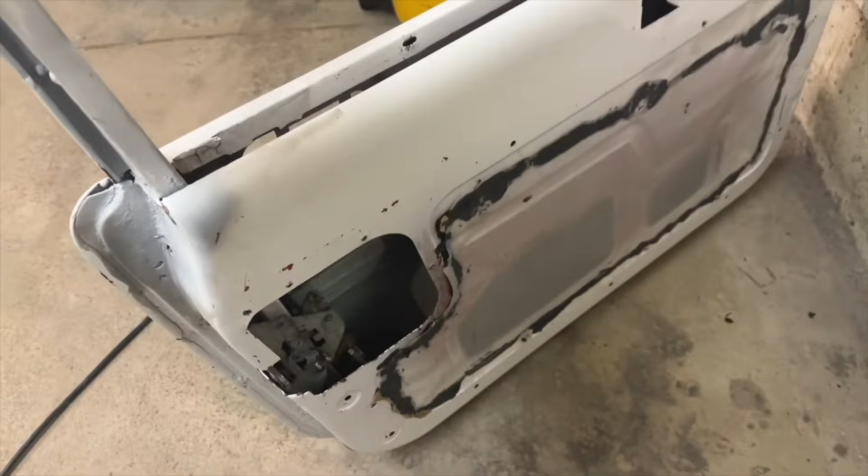Hey everybody, BV Matson here, stripping down the Jeep Wrangler from 1994 to do a paint job. And that means I got to strip down these steel doors. The goal is to get these stripped down so I can sand and paint, so the handle's gotta come off and the lock's gotta come off. Also all the weather stripping and the interior handles and all that good stuff. You'd think it'd be easy, but it's a little bit of a process.

It's gonna be easiest to start with the window rolled down. This first seal should just pull all the way out across the top. Once you get down below the window, you're gonna run into some little hooks. Just pull on that thing a little bit and these are gonna pop right off. They're little hooks, take a look at them. Just like that, go ahead and just kind of tug and pull gently because you don't want to tear the little holes in here that you need to get at, so gently coerce those loose. Eventually you'll have the whole thing in your hand.

There are also a couple seals on the lower edge of the window. Simply grab them firmly and kind of jiggle those loose. They can be kind of tight, but once you get it, it'll pop right out. There's going to be two of those, and you're just going to kind of give these a little tug. You'll see you're basically just loosening these from some little slots.

Next up, we need to get this door panel off. You're going to need a little Torx set. In order to get these screws that hold the handle down, you're going to want to take both of those off. With that handle removed, you can pop off the little cover on the crank. Go ahead and pull those off. We'll get the crank off next. Just like that. Keep your crank handy though, you're gonna need it.

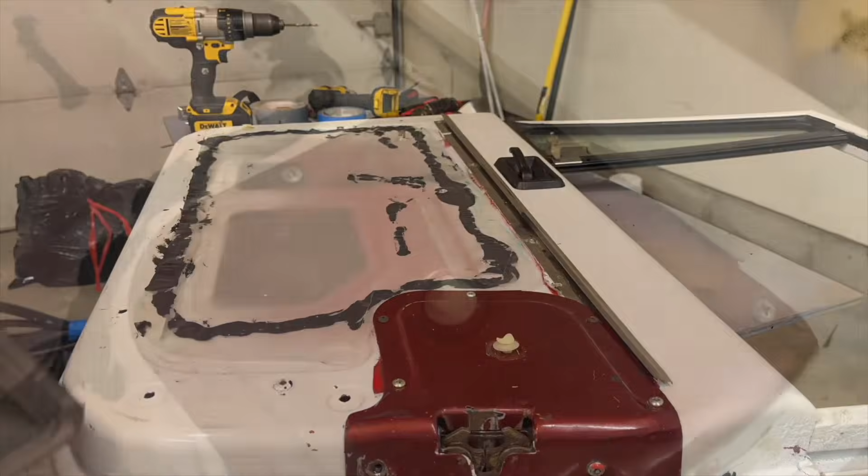And there's gonna be just some pressure fittings all the way around. Work your way around and start popping this thing loose. Once you find them all, you should be able to just lift the cover right off. And if you lost a couple of these along the way, don't freak out, it's an easy fix. Next up, we gotta get this cover off.

A bunch of Phillips screws right here, and then there's gonna be some Torx down here. These are gonna be a T27. Be careful with these though, you can cross thread them, and you can strip out the heads on these real easy. Ask me how I know. Alright, now we can remove the cover. This reveals all kinds of fun stuff.

Next up, we gotta get this door handle off. Just reach down in here and take that bolt out.

Next up, and don't forget this, be sure to roll your window all the way up. I want to do a nice thorough job of painting this, so this chrome strip that holds that inner cover in needs to come out. It's just riveted in on this one, so I'm just going to drill those out.

Slow and steady wins the race. And that's why you roll your window up. Now we get to start having some fun.

We're going to identify these two rods. These actually run all the way over to the door handle. We need to get these disconnected. So there we go, we're going to follow these in. We've got these two that we need to disconnect.

There's two different styles of these. On this one, you're just going to push the plastic piece out and lift that rod up. Right here, I'm just going to push it out and lift that rod up.

Let's take a look at that other variation. Some of you may run across some that look like this, like little metal pieces, and the ends of your rods aren't going to be bent. They're going to be kind of serrated a little bit. You're just going to pull those straight up. They should pop out. With these disconnected, you're going to be able to lift up your handle and just pull this thing straight back.

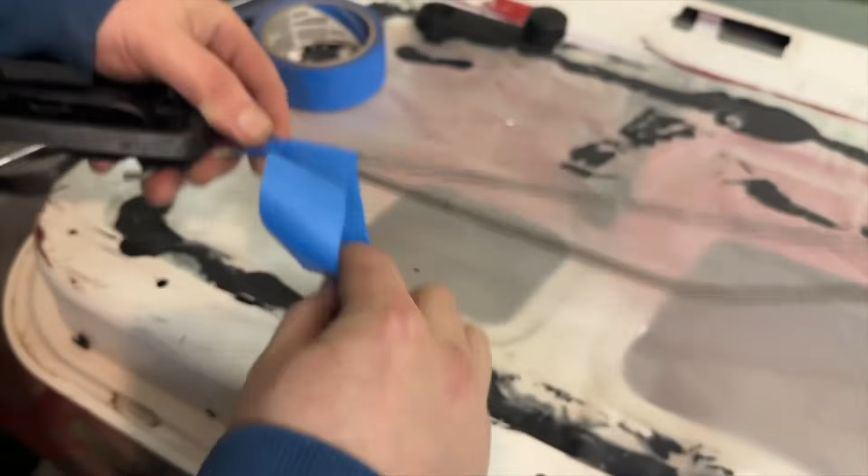While it's all still connected, I like to tape these together. These can be a little discombobulating if they get separated. So I like to tape these together and then write which side of the vehicle they came off of.

Next up, let's get our lock out, and I want to show you how this actually works. It's locked in, out on the outside of the door, and underneath there's this little shim that slides into a slot on your lock. That's essentially what's holding it in your door.

So to get that lock out, you need to jam or punch this little sliding piece out. It actually goes up in there, like something just like that. But you want to hit it from the inside of the door, hitting this to loosen that up so the lock falls out.

Before you can do that, go ahead and do the same thing: unlock the little bar that goes to your lock and lift that up.

There's one other piece that we need to get off, and it's actually one of these little clips, okay? You're going to need to grab that. It's right around the end of the pin on the lock. You've got to get that off.

Best way I've found is to get a really narrow flat screwdriver and work your way in there, get some leverage, and pop that thing off to the side. If you've got a magnetic one, that can really help too, because you don't want to lose that little connector piece.

There you can see I popped mine off, and sure enough, it fell down in the bottom. You're going to have to get a magnet. Once you get the clip off, you can just pull this whole assembly rod out and put that to the side. It's really tough to see, but you can see around the lock on the lower edge, right down there, that's where I'm going to be hitting.

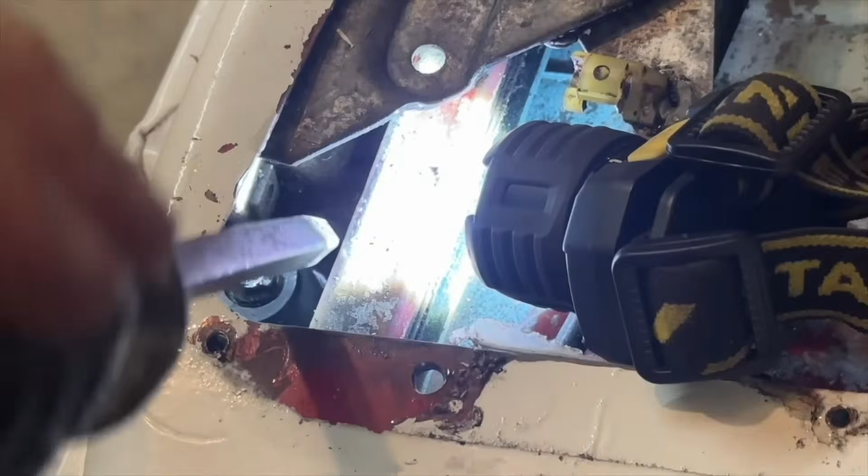So I'm going to be hitting down, trying to slide that off the lock. This is gonna be almost impossible to show you, but what I'm gonna do is take a long flat screwdriver, a really long one, and slide it down along that ridge, get a little angle to it. It's tight, and just drive that out.

I'll be honest with you, getting these out the first time can be a real bugger, a nuisance, I don't know, man, it's everything. This thing blew my mind the first time. Once you get that out though, that lock should fall straight out the bottom.

Now we're moving on to get this door handle out, and I'm telling you, this sucks. I hate this. This is miserable. What you've got to do first is get down underneath here, and there's going to be a little R-clip. Go ahead and pull that.

Here's a good look at that R-clip. Just a Phillips screwdriver, flathead screwdriver, whatever, just going to pull that, pop it out. Having a magnetic one's really nice because it comes right out.

You need this, get that off of there. From there, you can go ahead and lift this rod up. Might be a little stuck, might have to pry it off a little bit, but now it's disconnected from the door handle.

Before we get into getting this out, I want to show you how this works. So there's this little clip - you don't want to break these, you don't want to bend these - but they slide on the door handle just like that. What actually holds the handle in is you put the handle in, the sheet metal on the door is here, and then we're sliding a wedge through, and this little piece is going to click, click, click, click until it gets really, really tight.

Now, to get it off, putting it on isn't so bad, but getting it off can be a real bear. Let me get this off of here - you got this little piece, we're going to take that off. To get it off, you're actually going to drive this whole thing through the door handle. You need to get behind it with a punch and drive it through.

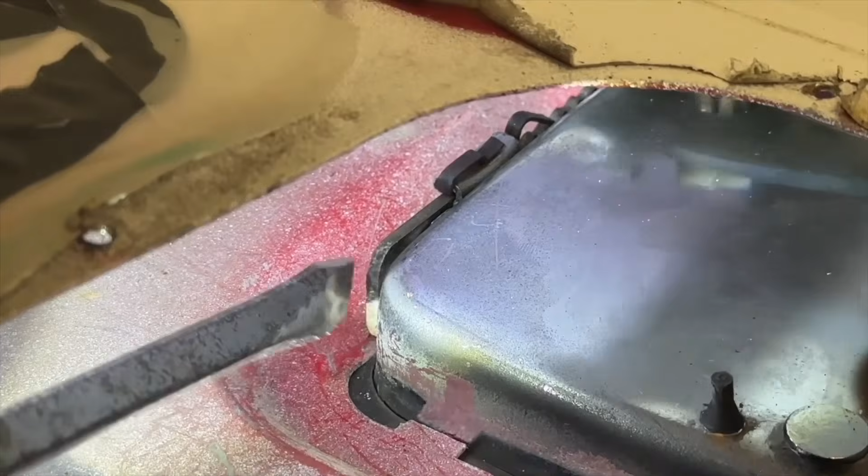Once you get it forward a ways, if it doesn't fall out, don't worry about it, just leave it there for now, and then turn your attention to this one over here. This one is a booger - this one's a little trickier, the inside one, because you don't really have a nice right angle at it. You can't get at it really super straight, so it's a little kitty wampus.

But again, same thing - once you've gotten both of those all the way forward, what you can do is get your window coming back down. Shouldn't be that big of a problem to do. There we go, just had one of the rods in the way there - glad I noticed that, that could have been a problem. But I'm just going to pull this window down as far as I can get it.

And now we can attack these from the top. This is going to be really hard for me to show you, but if you look down through the top, there you can see that bugger. You can grab that with a needle nose and start pulling it forward. Then you can move over to the other side too - they're both kind of snaked in there.

Just be really careful of your window. Grab them and start pulling them forward - eventually they're going to come loose. I'm just going to get in here, reach back and pull it, and there you go - that one just fell over. It's hanging out there. If you got a little angled set of needle nose, it really kind of helps relieve some of that pressure - just going to try to pull that forward.

So I'm really struggling with this one. One thing you can do is get underneath of this part and pry that up a little bit - make sure you're getting all the pressure off of that piece. You can bend it back later on. I wish I would have caught it on film, but as soon as you get them both out, your handle's gonna fall on the floor.

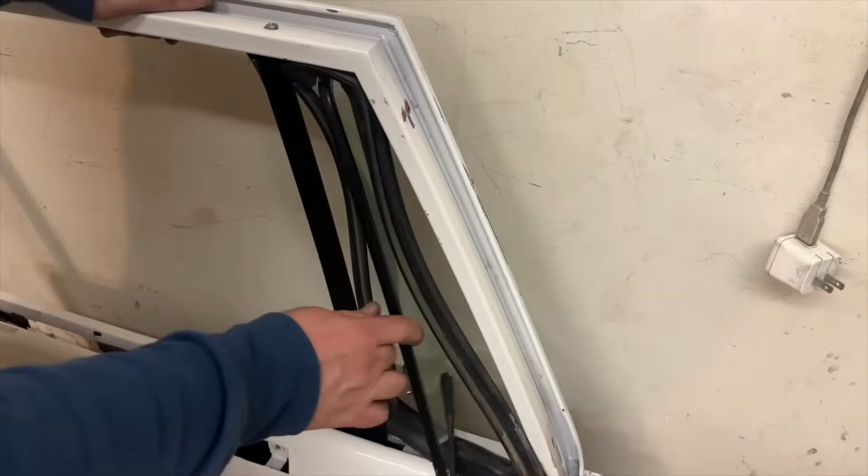That's really about as far as I need to go. You could take out the corner window here if you wanted, but these are in really good shape so I don't need to. I just pulled all the molding back, and I'll tape and bind this all up really good to keep it out of the way of paint. It's going to be fine.

So there you go. This is ready for sanding and paint on the inside. The exterior is ready for paint too. The Jeep engineers make us work for this.

One thing I'll also say is that if your steel doors are already fitted to your Jeep, I would highly encourage you to just leave these hinges where they are, because aligning and fitting those steel doors was an absolute nightmare. Just leave them alone, paint over them.

Also, be sure to bag and tag your parts. Everything on here is pretty much right-left specific, so do yourself a favor and bag and tag. This is going to be a big project, sanding this down and getting it all ready for paint, but I think it's going to be a really fun adventure.

Now that the doors are all stripped down, that's probably where I'm going to start.

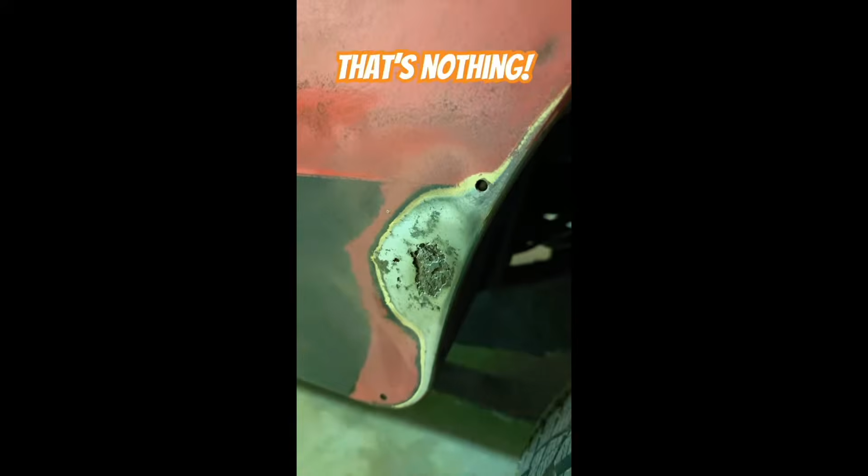There's one more I've got to attack on the passenger side - wonder how deep this one's gonna go. It might be easier just to bite the bullet and buy a new fender for this front driver's side. What do you think, is this fixable? I mean, it's a Jeep. Who knows what other kind of surprises lay in front of me here, but I kind of expected that one on the front.

Onward and upward with this awesome little sander, though. I'll keep you posted as I make progress.

Well, this escalated very quickly. On the plus side, it's going to be real easy now to adjust my alternator belt. Keep on wrenching, friends. But there it is.

That is going to be a project. It's going to need some repairs. You can see here, this is the only major rust damage, knock on wood, that I've found so far, in this windshield frame. You can see going down there - that's a very common spot for these YJs to go bad.

Well, things have definitely escalated on the 94 Wrangler YJ restoration - is that what I call it now? Both fenders are off, that hood is detached, and we're replacing that windshield frame too while we're at it since that thing was rusting out. We've pretty much got it all stripped down. I'll get the hardtop off tomorrow, and the goal is to get that thing repainted.

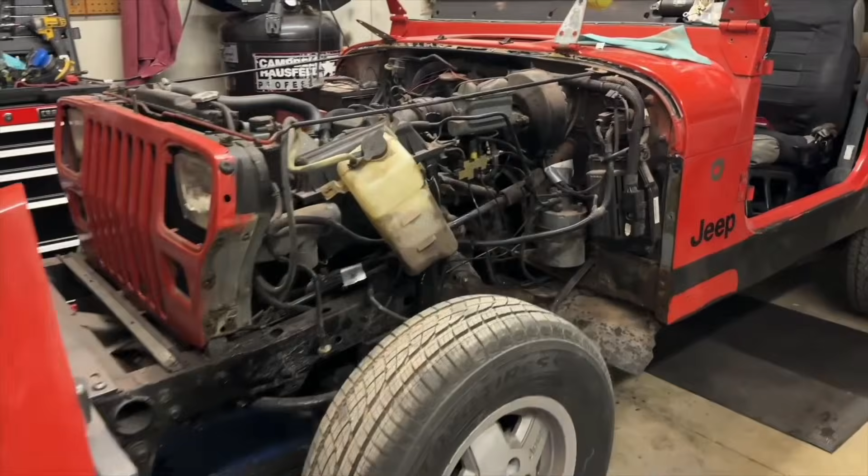Things have escalated pretty quickly on this 1994 Jeep Wrangler YJ. You can see we've been going to town on things. Instead of trying to fix those cracked and rotted out fenders, I actually just ordered a set of new ones, surprisingly cheap. Since I'm gonna be painting everything, I figured you gotta take the hood off, you gotta paint the hood, you gotta do it right. So I went ahead and did all that. Windshield frame is also out. Front fenders. Man, a lot of opportunities here to clean up things.

I'm finding it hard to not start going and dealing with all these little rust spots. I've also found that getting this little strip of black off this thing is going to be a massive consumption of time. As I've been diving into things, I've been finding some trouble spots and dealing with those as best I can. I actually had a guy come over today and take a look at some areas I'm going to need welding done. He took a look at pretty much all the different spots, and I think I'm good, pretty minor, and I'm going to be in good shape.

The first big project I'm going to do is clean up and paint the underside of the hardtop, then install new gaskets on my windows, and then paint the hardtop as well. I'm probably going to do the hardtop this weekend, but I was also looking, and I was like, well, you got the fenders off, you might as well replace the shocks, you might as well replace the brake lines, you might as well replace all these different parts.

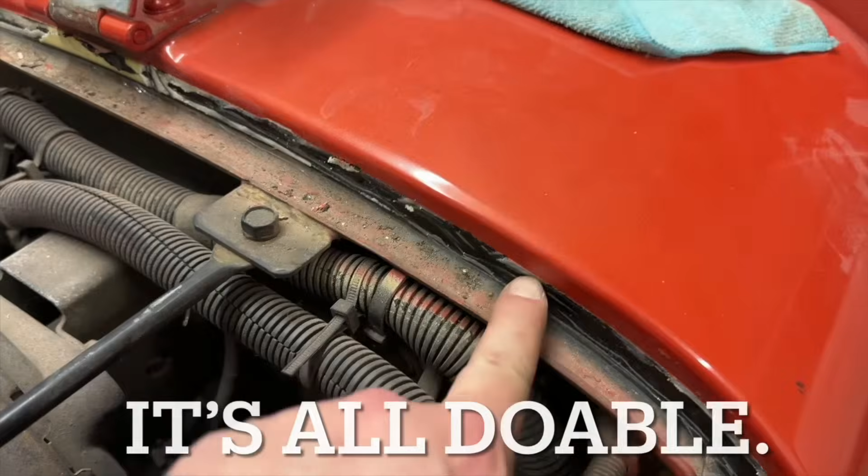New shocks, all kinds of parts are arriving in the mail daily. At the end of the day, it just comes down to me getting out here, spending time in the shop, and starting to get things kind of cleaned up. Like in here, there was a gasket or a little seal for the hood, and it was just painted over with orange. So I went ahead and got a new one, and now I got to get in here and get all the remnants out. I think that's a good job for a wire wheel.

For the most part, all the bolts came out when pulling the front fenders. I only broke 2 bolts. There's one right there. It's probably the best one to break because that's going to be pretty easy to drill out, and I can find a new bolt for that. Over here, I've got my new windshield frame, new glass, new seals. Parts are piling up really fast.

I'm really going to need to start taping things off and getting paper and plastic over stuff because I certainly don't want to mess up this really awesome interior that I got done completing earlier this winter. Parts, product, all kinds of things are showing up every single day. The biggest thing that I'm noticing on this Jeep Wrangler project is space. The mechanical stuff, the wrenching, the painting, all of that, it is what it is. But it really comes down to space. Everything is so much freaking bigger, and it's really stretching my limits on this single stall garage.

So I'm having to get pretty darn creative. I did get some cool new stickers for the shop. I think there's going to be a lot of MacGyvering it going on. Oh, and for those of you wondering, I'm going to up my game.

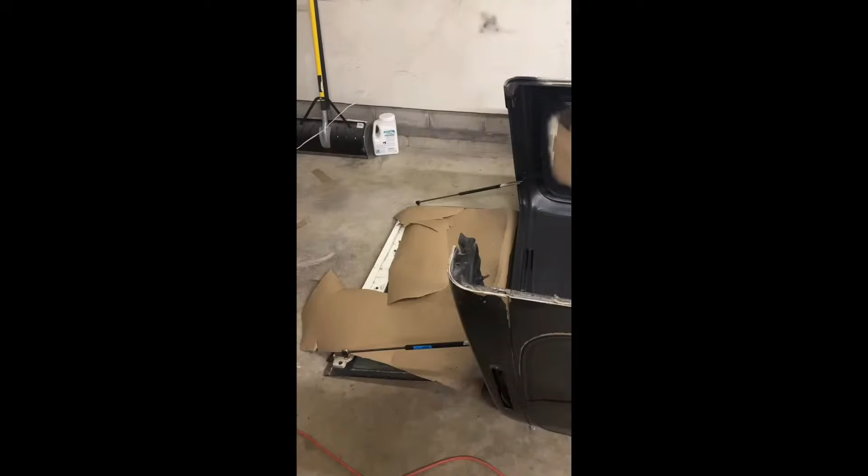And then I rocked some 120 to scuff it up. After that, I hit up the old shop vac to vac up the dust. Then I wiped it down with a proper degreaser. From there, it took 2 coats of the Raptor truck bed liner. I think the taping off of the window took the longest. I'm excited. This is gonna look sweet.

1 more objective completed. Hey everybody, BB Matson here, in the process of repainting the Jeep hardtop. In order to do so correctly, you really got to get these window seals out. These aren't fun. First step, you got to get this little connector piece off.

Just get a flathead screwdriver underneath it and kind of wiggle this thing out till you get it free. Should just kind of flip right off, just like that. Next thing I do is get your penetrating oil and kind of pre-treat some of this stuff. Let gravity go to work. Let's get some lubrication inside these seals.

Your heat gun is going to be your best friend today. This is what that weather strip looks like. That's the outside, and then you've got kind of a knurled interior. Get underneath every piece of that you can.

From there, you're just gonna slowly start working your way around. Heat and pull. I got medium heat on my heat gun, and I can just pull and heat. Slowly but steadily, it's coming out. Don't break it.

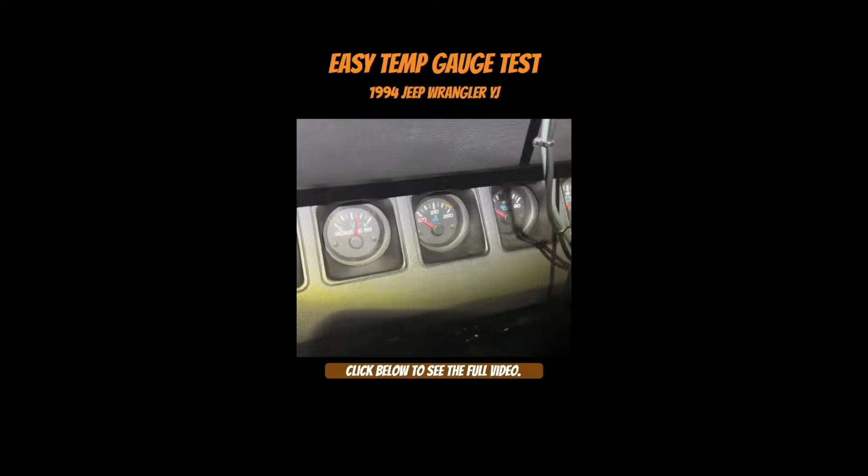It was inevitable, the sanding needed to begin. Had to get in here to attack some trouble spots. That one looks like a little kitty cat. Pretty minor stuff till we get down to this point, that one's popping all the way through the floor.

Had to power through these Jeep decals on the side, and I'm telling you, this undercoat on the outside, this black stripe, this is taking a lot of effort to power through. But my trusty DA is kicking butt, and my air compressor is earning its rent.

Hardest part of the day was getting these rubber interior rear fender covers out, those things were a pain in the butt. But now I can get in here and clean up all this rust and make sure that all of this stuff gets protected for the long term. I got a table full of everything I need to turn this Jeep satin black. This has become quite a project.

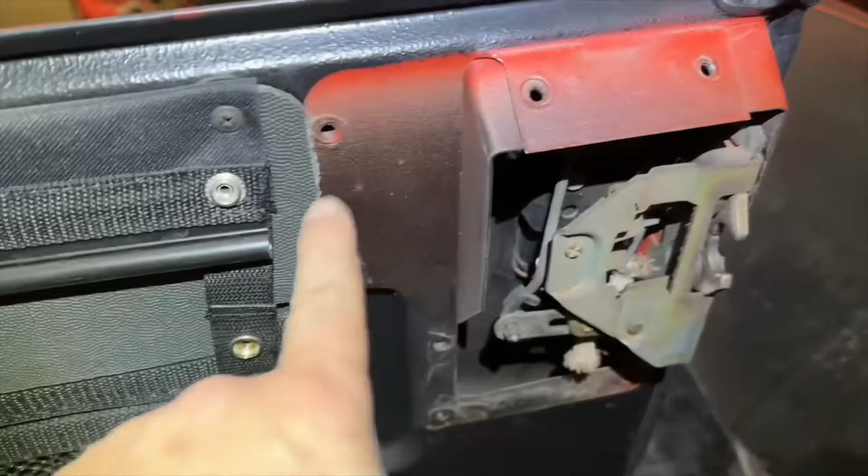Making progress on the Jeep, but we got to get this rear door handle and lock off so this can get painted. I already took it off, but there is a little cover that goes over the mechanism. Just a bunch of Torx bolts, pull that off and the cover comes out, and this is what you see.

First things first, let's unhook the mechanism, very similar to the doors. We're just going to tilt this little piece out of the way, and this little bar should pop right out. This bar that we just took out actually operates the lever.

When you're taking out the cover, the mechanism should come free at this point, so try to pull this thing straight out. I got one rogue Torx hiding here. Once I get that, the whole assembly is going to come right out. Once you get that loose, you'll be able to tilt this out and get the whole thing apart.

This is tied to your lock. To get the lock out, it's going to be the same deal as on the doors. We just need to kind of knock this shim out. We're going to get a flathead screwdriver, knock that shim out, and the lock should pop right out the front. Let's see how easy this is going to be.

Just like that, it's sliding out and into the bottom of the door. Time to go grab the magnet. But now we can go ahead and just push that lock straight through.

Note the orientation of this connector. It is pointed down. Now we're looking at the door handle itself. It's just 2 Torx bolts holding that in, and then that should pop right out the back. Let's see if we can get lucky with these.

Just like that, nice and easy. No issues at all, except dropping the bolt on the floor. And there goes the other one. And with those 2 bolts out, the whole unit is going to pop right out. Even got myself a couple of free stink bugs.

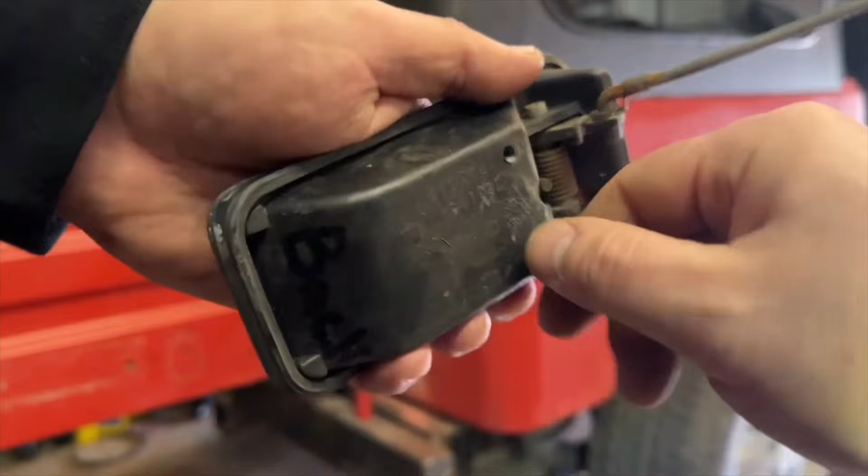I'm going to go ahead and put these screws right back in here so I don't lose them. And as always, it's good to bag and tag your parts to make sure you don't lose anything. That was actually much easier than I anticipated, but now I can feel good about getting this sanded and primed and painted.

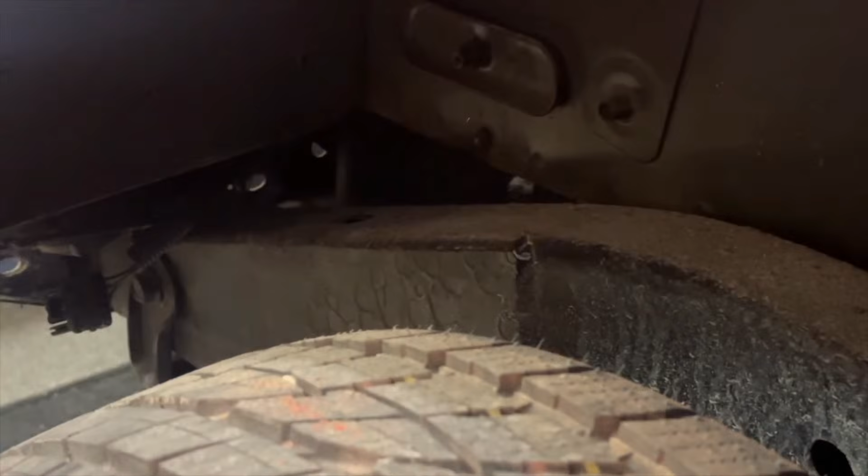All right, from here on out, I've got my respirator on, and I'm just going to start moving that tube inside the frame. I'm starting from the back and working my way towards the front. I think the most important thing is to remember where you left off and then try to do an overlap on your next coat.

So I'm going to go in towards the back as far as I can go, and then towards the front as far as I can go and pull that back, then go to my next entry point, back, and then towards the front again. I'm applying a pretty wet coat, or two passes wherever I can. I don't think you're going to be able to get to every spot of the frame, so in areas where I thought I was coming up a little short, I'd really pour it on thick, hoping some of that would travel down to areas I couldn't quite reach. But for the most part, I feel like I was able to reach, I'd guess, like 80% of the frame from the different access points I had.

Another thing I noticed on my first run on the first side is that you need to shake this can periodically while you're doing this. If you do one pass, shake the can before you do the next one. The can tends to depressurize pretty quick, and I think I wasted a little product on my first run because I didn't really read the directions that close.

Just keep going. I'm just trying to find every entry point that I possibly can and working that hose back as far as humanly possible. Make sure you're wearing gloves, because this stuff is really hard to get off your fingers. Also watch out for when that nozzle starts to pop out of the frame - it can be a little unwieldy as it's coming out. On my first pass, I actually sprayed myself over my glasses and my hair, so that was kind of annoying. But just try to be as thorough as possible.

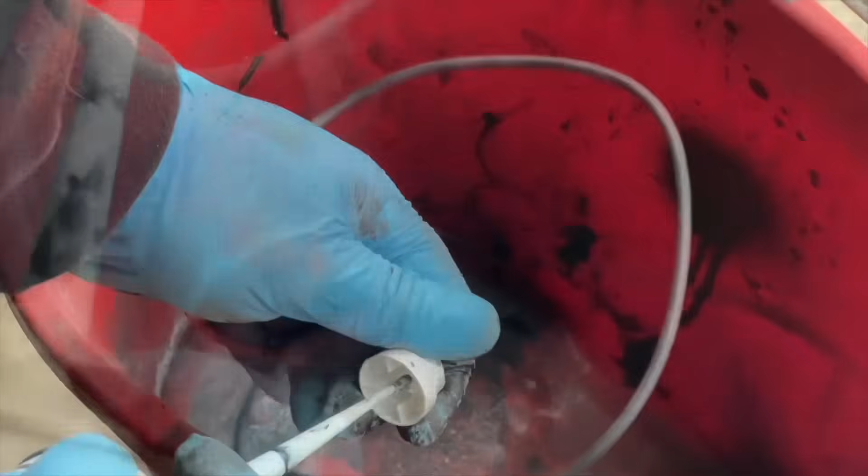Here's another technique I got a little better with as I started using it: feed it all the way in, then keep your fingers kind of toward the opening of the passage and slowly pull that tube out. Because if you're just pulling it from the can, it's going to pop out and spray everywhere. Once you're done, you can actually reuse and keep this hose kit - there's an aerosol cleaner that plugs right into that cap. Give it a few good solid sprays and that hose is going to be clean, and you can use it for other applications. There's all kinds of uses for this little tube to reach some hard to reach spots. So clean it and keep it.

All right, so there you have it. One thing I will say about this stuff is this can goes really fast, so be prepared to work fast - that's really, really key. It took me about one can to do one side of the frame. I actually wish I had one more so I could go a little wetter coat on some of it - maybe I'll pick up some more, I don't know. But I think 2-3 cans, you should be able to do the frame of your Jeep.

Another thing I'd say is make sure you get some cardboard down - you're gonna be dripping out the bottom of your frame in some spots. You can see, hey, it protected my leaf spring. But that job is done, I've gone all the way around. I think I got good coverage because I had stuff pouring out onto the floor. But yeah, I went as deep as I could on this - at least did due diligence on trying to save this 94 YJ.

So there you go, that's what I tried. We'll see how it works. I mean, hopefully it's as advertised.

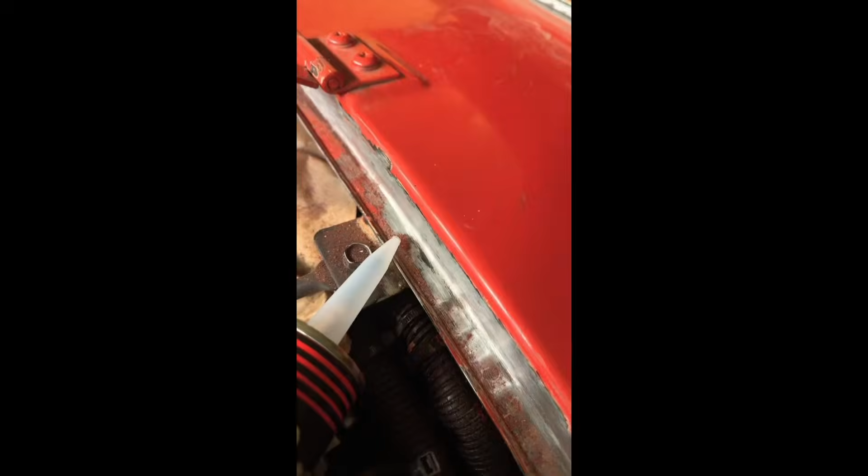Between the two of these, this one sucked more. A lot of goo gone, a lot of elbow grease going into getting that adhesive off. This Jeep is full of 1-hour projects.

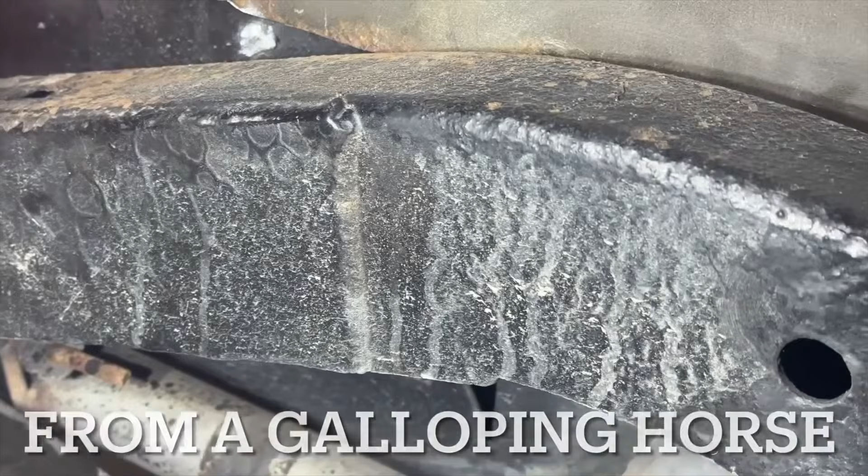I'm actually really glad that I found this. It sucks, but I'm glad I found it. When I started working on this frame, from a galloping horse, this actually looks really good. It's just this old undercoat that is on there, and underneath there are definitely some surprises.

So as I'm working my way around finding all the loose bits, that's where I started diving into this little gem. So again, with the rust encapsulator, you're just trying to get rid of any flaky bits. So spend your time, do your due diligence, get in here, and if you see flaky rust, attack it with vengeance.

Once you knock off all the flaky stuff, go ahead and use like a 220 sandpaper. And what you want to do is you want to scuff up the entire area that you're going to treat. Scuff it up really, really nice. Get it where you want it.

I'm going to end up doing this whole fender well just to future-proof things a bit. And I'm also going to start hitting this frame. Now, because of this little gem, I'm going to skip it. I'm going to probably stay here to here. I'll do this later. But I might as well treat this while I'm at it.

And once you've got that all sanded down, go ahead and degrease the part really, really well before you apply your rust encapsulator.

Cleaning your surfaces is really important. This is something I've learned over the years, whether I'm working on motorcycles or Jeeps. If you're going to apply a product, make sure the surface is clean so that it adheres and actually does what it's supposed to do. Take your time on this cleaning process. It's really important.

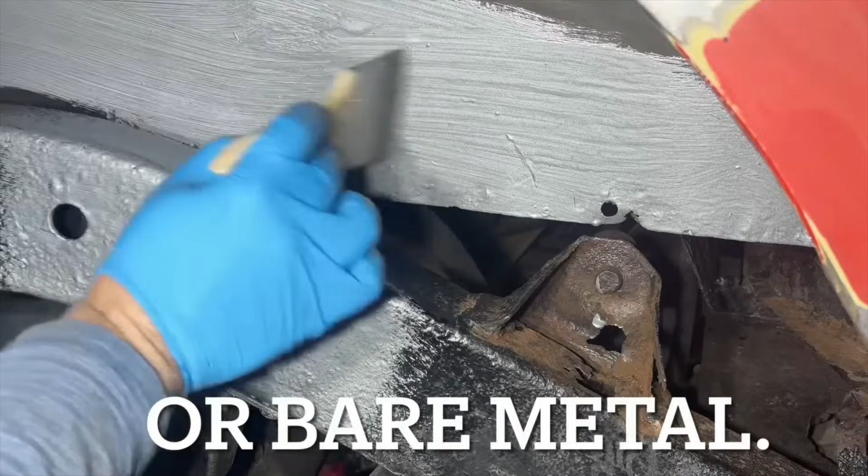Lay it on thick, ladies and gentlemen. If you don't have serious rust present, I suppose you don't have to cover it up. But here, I definitely have some rust starting, so I'm gonna get pretty aggressive with it in this space. Other spaces, I probably could just apply the undercoat and it would probably be fine. But you know what, you can put it on bare metal too. This is bare metal basically, so I'm gonna go ahead and do it.

When in Rome. Here you can see a nice welded plate. I'm gonna make sure that I cake that onto any of these weld seams, and let's just make sure that these really well done repairs are protected for the long haul.

All right, I've been down, around, up and around, up and down, just trying to make sure I get a good coat on everything, top and bottom. Again, I'm leaving this spot clear because I'm gonna need to obviously do some welding, but I'm just touching up everything that I possibly can.

Spent a lot of time underneath the Wrangler. And there you have it, ladies and gentlemen, all the way down both sides - we gotta fix that - but moving all the way through, all the way to the back. Eastwood rust encapsulator to protect this frame for the long haul.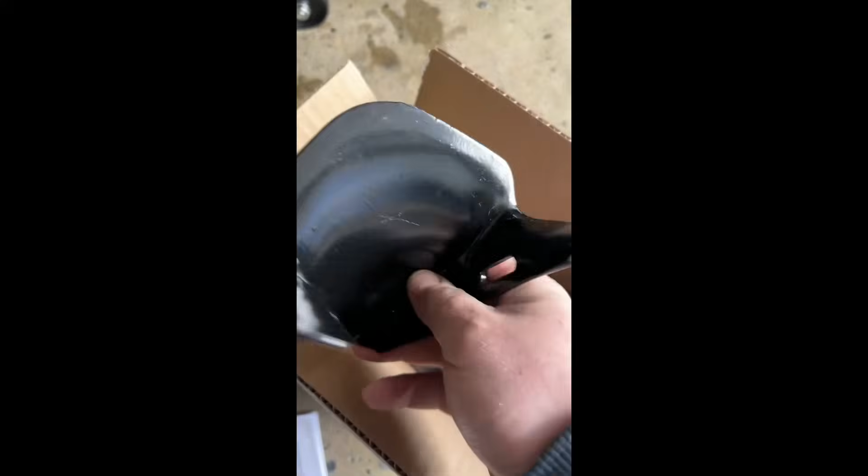Luckily we got an easy solution, well, relatively easy, apparently it's a pretty common problem. Taboo Customs makes a kit. Check out this kit, it comes with a new rear shock mount and the plates you need to weld in to make sure you do the job right. The kit comes with both sides, but luckily my driver's side is A-OK.

Getting ready for a productive day tomorrow. I really wish I would have covered up this interior before I got to work, that's gonna be a major detailing job. Front shocks are in. Once the repair is done tomorrow, the rear shocks are going in too. I'll try to shoot a video of the progress tomorrow.

It was a big day for the YJ as we cut those rotted rear shock mounts off the frame and got ready to weld some new ones in. The bulk of the work was grinding the old one out and getting that surface nice and flat. Check out this huge hole left by that rusted out shock mount. Luckily, I've got fresh metal going in here.

I got to give props to Lucas, man, he showed up with his mobile welding rig and got the job done right. Look at this, this looks beautiful. It's probably the strongest point on my Jeep now. Big props to Lucas's Portable Welding in Gregory, Michigan. If you need anything, hit him up.

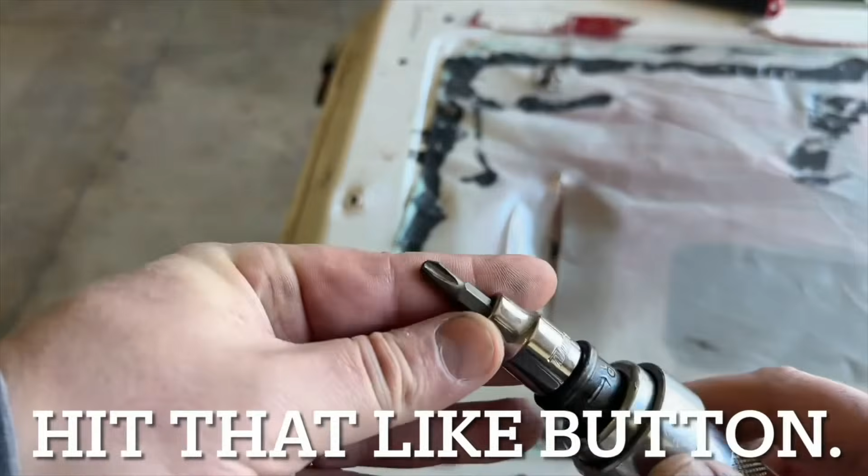While that goes to work, I went into my tool cabinet and found one of the more aggressive, girthy Phillips head screws, and put that on my impact driver. Let's see how it goes, let's see how close these threads fit. You know what, I think that might actually do it. Will they turn? Come on, come on. Hey, I actually got that by hand, that little screw came out.

How about that, now all we gotta do is pull that screw out. That's what it looks like right there. And now that rod, you can see the metal, that silver metal, right there. That rod's gonna be free.

One other connection to check, go check on the top of the window. Here's the rail, on the top there should be a screw there. Unfortunately mine is gone, let's check the other door. The other door seems to have a screw, gonna have to go find one to replace the missing one.

Once you've got those two connectors out, you can actually just slide the window over and lift that up. Careful of the glass on the inside, see, it might be better to go down, I'm trying to figure out the path of least resistance here. But eventually you're gonna be able to rock this whole vent window out.

It's hung up on the glass, let me show you this. You want to be really careful here because you can see there's a groove in that glass. But just slowly but surely, that will pop right out, and hopefully pivot this thing out of the door. So you can see I got hung up there a little bit, just move it forward and pull it out.

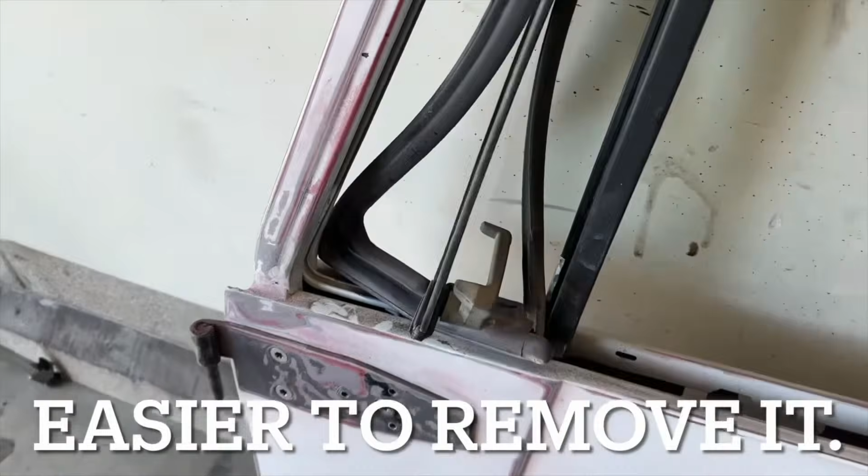I was looking at this and thinking, okay, how can I tape this off? How can I protect this gasket and all that? Two bolts, you get it out, and now you've got a really nice, clean surface to deal with. You can make sure it looks nice and tight when you're done.

Well, the first one went smoothly. I hope I have the same results on the next one. Hope the video helps you out, man. I puzzled and puzzled as to how the hell those things came out. That's how you do it, right there.

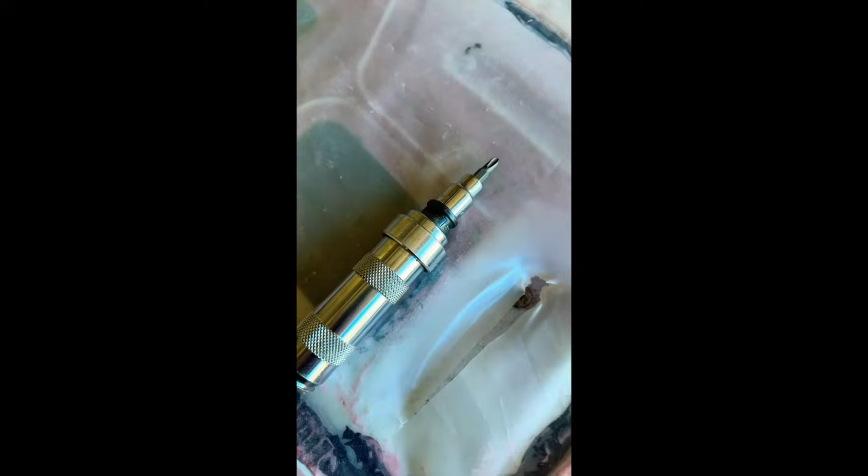You may or may not need an impact or some other tools because these can be a bit of a booger. I'm gonna hit mine with a little PB Blaster. Insert the screwdriver and hope you can get it out. These are pretty easy, I'm getting lucky today. Remove that bolt, move on to the next step.

Now all you gotta do is pivot your window in, lift it up, and start to work it out. Start pulling it straight back. Gentle, there is some glass in there to watch. Once you get it that far, you might get hung up, that's because there's a little flange on the end there. Just tilt it over and it'll come right out. And that's how you do it.

Hope it helps you. I gotta say, these turned out pretty damn good. I went with the Raptor liner, did the undersides of the fenders and also the inside of the engine well. I love how easy that stuff goes on, and this stuff is bomb-proof when you get done.

These fenders are ready to get mounted to the Jeep Wrangler. Had some extra, so I did the underside of the hood too. It's go time this weekend.

Happy Friday, everyone. It was a busy day working on the Jeep. Some incredible progress, the new front fenders are installed. I got it all seam sealed. Whew, this thing turned a corner today.

Thank God they look straight. You know you had a good wrenching day when your hands look like this. Just a little bit of anti-seize. Nothing like a good mix of anti-seize, spray paint, who knows what else. It's a beautiful night in Michigan.

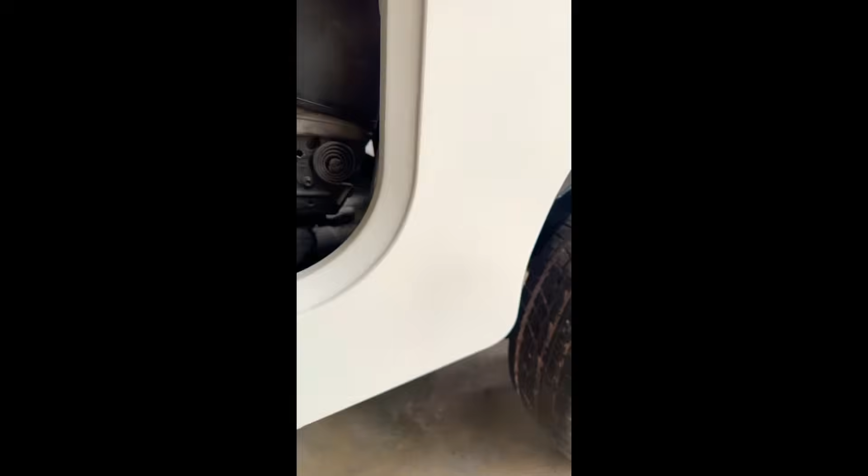Still working on the Jeep 94 YJ, and I gotta say, I'm pretty pleased with this Bondo job that I did. Check this out, the other side was basically the same, and that's pretty damn nice and smooth with some epoxy primer over the top. Basically, I ended up getting down to bare metal on the bulk of the side, so I just hit this whole section with epoxy primer just to level everything off. Woo, I am not a body man. This is the first time I've ever really gotten this deep into stuff, but man, for a layer to work with, I'm feeling really good about that.

Me and the trusty DA are working on leveling out all of this stuff. And if that spot comes out as good as the other side, I'm going to be a happy camper. Onward and upward on the Jeep YJ restoration.

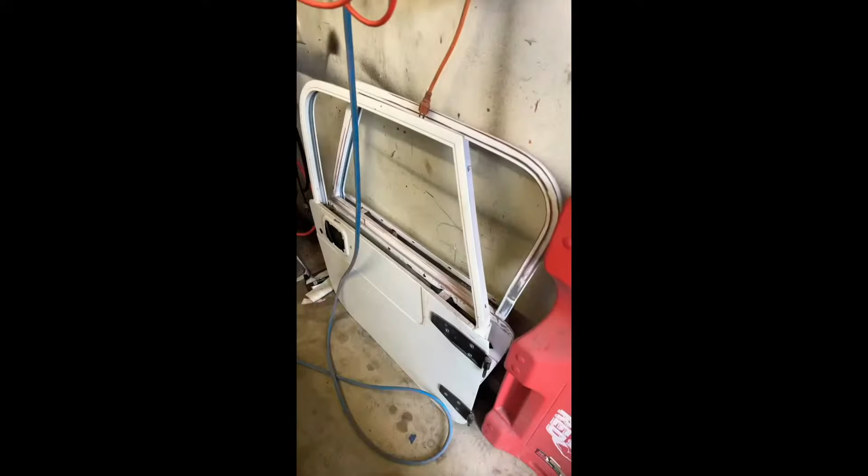The orange is almost all gone. A little bit more sanding on the hood, and then the 94 YJ is ready for some proper primer. Oh, I lied, I forgot, I still got to sand down the doors. But we made hella progress today, man. Got all the Bondo work done, got everything sanded out really nice.

Had some rust issues, kind of this bubbly issues, got those cleaned up. I can't even see those. Really impressed. And you know what, for a complete amateur, I'm feeling pretty good about this.

I am going to be refreshing myself on the whole process with these Eastwood products here over the next day or so, and I'll just be continuing to tape things off. I'm actually thinking about rehanging that rear gate too. Might be easier just to paint it on.

Other than that, I think it's beer o'clock, guys. Can I do this one-handed?

Keep on wrenching, friends. And we're learning something new every single day.

This Jeep Wrangler project's going to be the first time I'm painting with air. I'm using the Drizzle D1. What a stupid name, but super affordable. I think it was about $100 on Amazon, and the reviews online look really good. Comes with a regulator and a filter to get all the oil and water out of the air, so we're good there.

I've been just playing around trying to get my pressures right, so I'm going to go ahead and open my air and make sure my air is open down here, and then I'm going to hit the trigger, and that's basically right where I want to be. But you can dial this down or up as much pressure as you need. That's right about where I want to be.

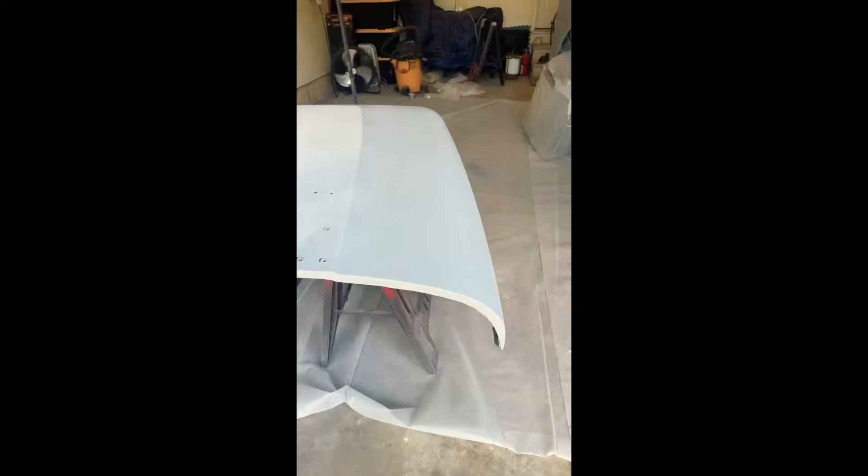And I only spilt my paint once. It did take almost an entire gallon to do the whole YJ. Both doors are done, the hood is done, and the whole damn Jeep is done. I'm not gonna lie, this was a lot of work for one person, but I am feeling quite victorious at the moment.

Just seeing these parts kind of stacked up feels really good. I tell you, it probably took me 2 hours to tape and plastic everything off, man.

Oh my God, what a journey. What a freaking journey. It's gonna be color coming up next, but wait, I got a boatload of wet sanding in my future. One thing at a time, follow along.

Be sure to subscribe. You know you're getting close when you're getting into painting nuts and bolts for reassembly on the 94 Jeep Wrangler YJ.

I think I'm done with primer. Wet sanding and paint tomorrow.

It is wet sanding day, and let me tell you, man, it makes a huge difference. I just got done with this. This is silky smooth. Here, I hope you can hear that. This is really coarse, nice and smooth. That's gonna be great. I'm going through 180 to 320 and 400 as finishing on wet sanding.

I am officially halfway done with the YJ. One more side to go. And the trickiest bit is going to be this iconic grille. The hood, the tailgate, one of the doors, and the windshield frame are all done.

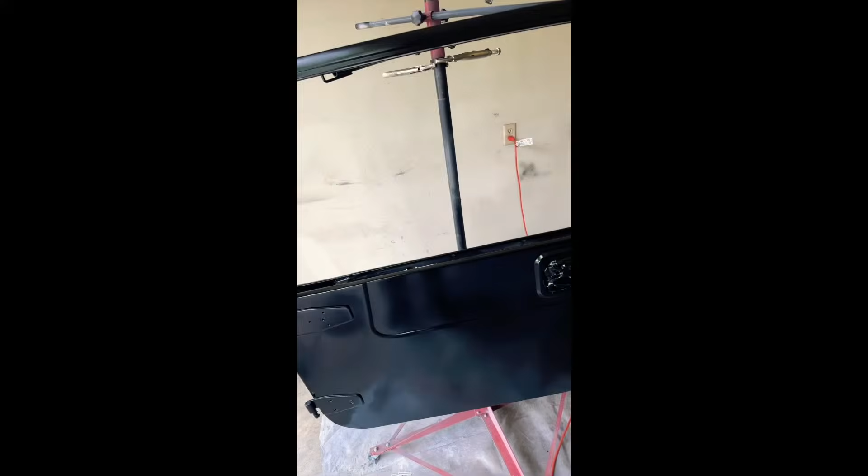Got the last door done, finally. Hood's hanging out getting some sun, and all the rest of the black bits are hanging out too. Not gonna lie, I learned a ton of lessons. This was my first vehicle painting job, first kind of real Bondo job, a whole bunch of firsts on this 94 YJ.

I think I'm gonna make a video about things I learned. There's plenty of videos out there about how to paint a car, but I learned some really valuable tips and tricks along the way.

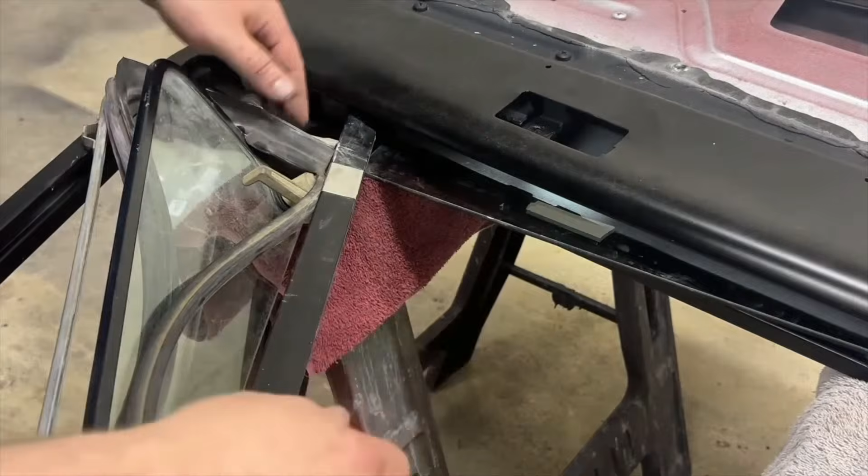All right, get your glass nice and clean and insert it into the rear area of the door. Make sure that you're sliding this into the seal, nice and level. Now it kind of becomes a war of angles. You want to slide your window in at a little bit of an angle. Make sure you're staying seated on that back side.

You're going to tilt this window, catch this back edge into the groove on the back side while kind of pulling this all back. Here, just like that. Notice I'm still connected inside the window on this edge up front.

With the window still resting in that slot, you're going to slide this window back just a little bit, just enough to get it into the groove on both the back and the front. It's going to look really kitty-wampus for a while.

Now this is where it just takes a little bit of patience. You're going to start rocking this, pulling the window kind of back up. You can reach inside the door if you have to get a little bit of leverage on the glass. But we're going to start moving this window down.

You just want to make sure that you're rocking the glass in at the same time that you're moving this in. You got to keep that window in the groove. You hear the grooves I'm talking about.

For the window, it's going to insert into this groove here. And then up on the front corner, it's got to be in that groove there. You got to keep your glass in this groove here, and then you got to keep your glass in this groove back here.

From this point, it's just a bit of a dance. You're just trying to find those perfect points of leverage. And if you know an easier way, let me know in the comments. But you're just kind of trying to massage this thing in, keep it in the groove, and start moving that thing down.

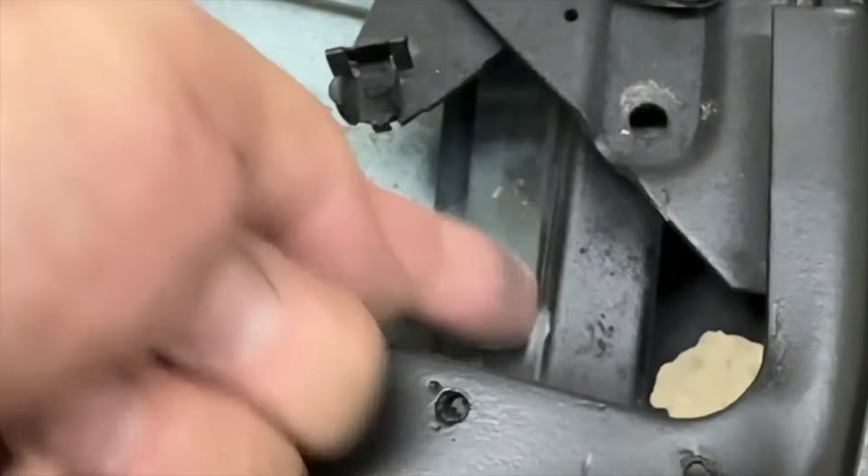It's tedious. Again, I'm not saying it's easy, but it can be done. Once you get it, you're gonna know because it's gonna go together like butter. I'm just looking, making sure I'm in the right spots, making sure both of my window edges are in the seals. This is looking good. Right there, my back edge of the vent window is in the seal. If I come back to the back side here, my window is also in the seal on this side.

Once you get it into position, you're gonna go to the top, pull that back all the way nice and flush, and you're gonna see a little screw hole there. Grab your screw, and let's put this in. Hold it all the way to the front, and put this in. This will hold that into position.

Now we got a couple more to go. Once I got that top one in, I'm gonna come all the way down and look down in here. I'm just gonna reposition this bracket just a little bit. Grab a screwdriver. Try to get this aligned without punching through the glass, because there's your bolt hole right there. You need to go and get that special bolt that we took out earlier, put that in there. There we go. Let's drive this bad boy home.

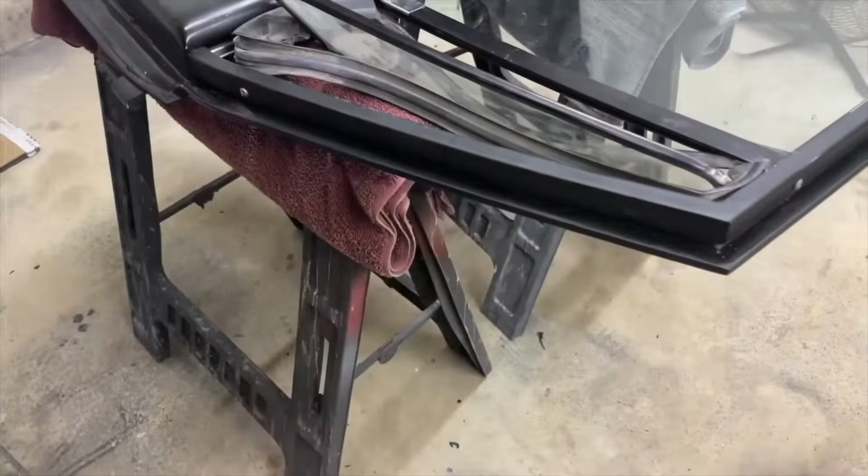So there you go, that's how I did it. That's how I installed the vent window, or reinstalled it, on my Jeep 94 YJ Wrangler. Looks pretty good. These seals are kind of a pain in the ass, but I'll get to those later. This was the main thing I wanted to show you today.

So I started getting parts one piece at a time, filled up the back of the Jeep, and started to get to work. Now, this was the big one - I found a rear shock mount that had rotted through into the frame. So that's when I got my buddy Lucas over here, and he did some heavy-duty welding for me, put in a new rear shock mount, fixed all those little rust holes that I found.

And then from there, I went to future-proof this thing. I spent hours under this thing, prepping the frame and treating that. Installed new fenders on the front of this thing as well. And then, again, I just keep finding these little issues that needed work. I got a hell of a lesson in Bondo - I don't know how many times I had to redo all of these things from step one. But it was a good learning process.

I'd never painted a car before, and this was the first time I ever laid primers and worked through paints. I actually really enjoyed it, but it is a ton of work. I ended up going with a satin black on this, and I think it came out pretty damn sweet.

One marathon weekend, and it was back together. Let's take a quick look inside. The interior came out really, really nice - all black, looking really, really clean. This thing is just super simple, super clean.

I love it, I love it. Got the CB radio all rigged up, got the barricade floor covers in there, and that looks really nice.

Come on back, let's walk on over to the other side. Got the keep on wrenching tire cover on it, which is really cool. Let's open her up, got some storage in the back. Sorry for the camera work there, I'm on a little bit of a hill. But yeah, I got some good coverage, good storage here - got jumper cables, tow ropes, things like that. And then I kept the back wide open - I took that spare, or the passenger seat or the rear seat out.